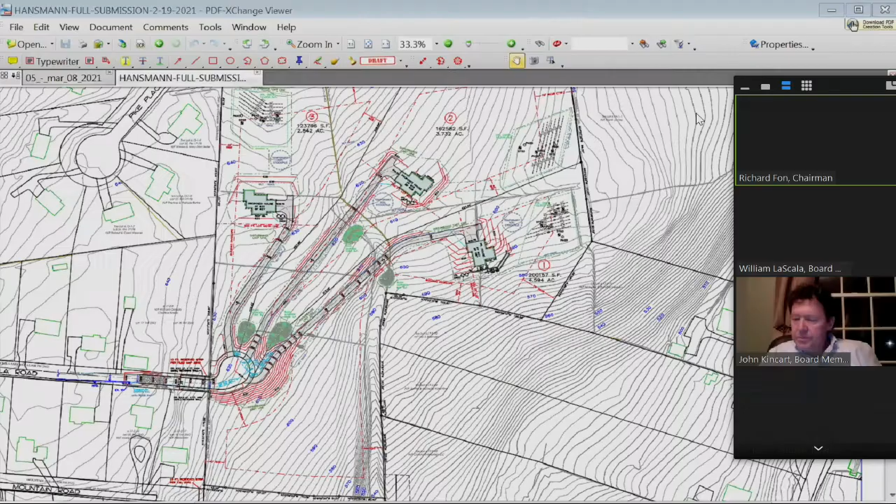Got it? Yeah, I got it. There you go. If you can see my cursor, all we're doing in terms of construction is a loop cul-de-sac that would serve as frontage for 3 proposed lots. That's the extent of the public improvement. The 3 lots that we're showing are zoning compliant.

All of the septic systems have been confirmed. In this arrangement, once the cul-de-sac is constructed, the lots would stand on their own. So if the map is filed, each lot would be sold or developed separately, and the access would be off the cul-de-sac. We did do a complete tree plan, it's included in your package. It's a little complicated to see at this point. We are showing 3 stormwater basins, and those would serve the purpose of treating any impervious areas coming from the proposed driveways. The individual houses would have their own drywells or subsurface systems.

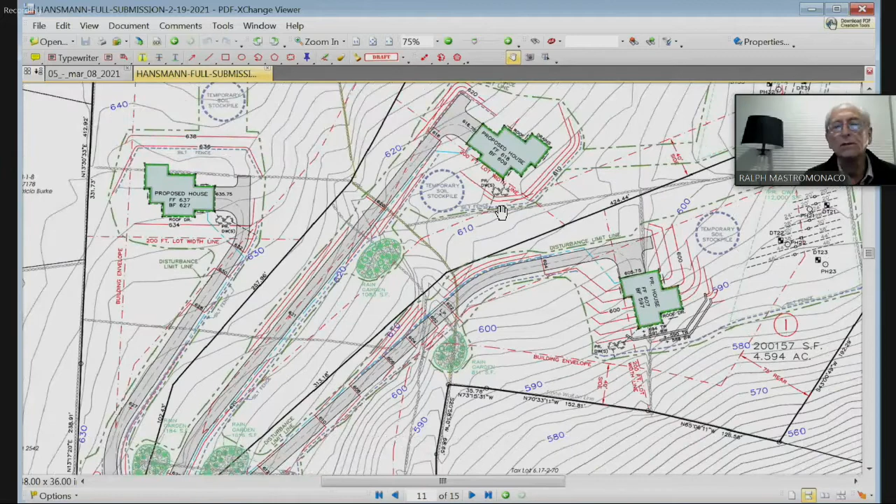The construction of that would start back here somewhere, and that would be a new road from here over. The site is fully graded. You can tell from that lot, it's fully graded. And this would generally represent the end product of constructing homes on that lot.

We've done an erosion control plan, and we've provided details. Other than that, I'm here to answer any questions that you might have.

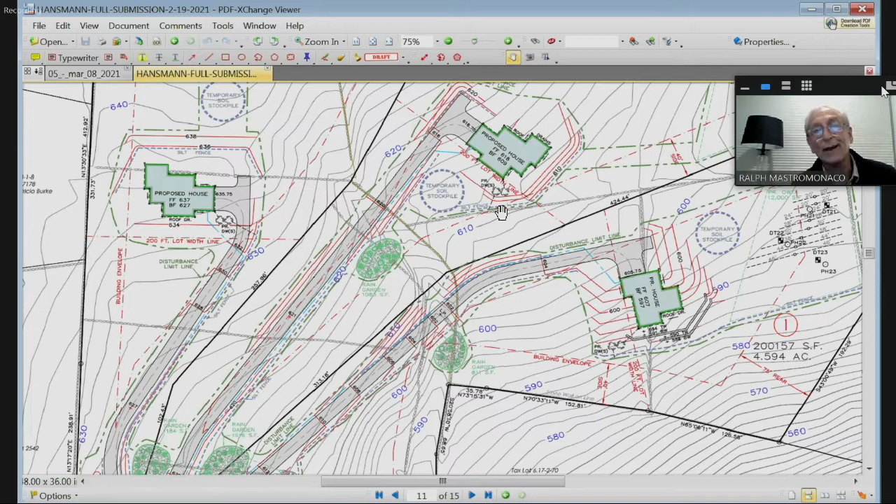I will say that we learned Friday that in our notice sent to the adjoining homeowners, 2 or 3 of the zip codes we thought were Jefferson Valley turned out to be Mahopac or some other town. We simply downloaded the information from the Westchester County GIS in those cases and didn't realize they weren't giving us the correct zip codes. So if there are complaints about an improper notice, there's no problem in us agreeing to postpone to the next meeting where we will get the zip codes right.

Jim, there were three properties - 2 of them were sent to Jefferson Valley and should have been Mahopac, and 1 was an address that should have been a PO box.

I believe the 2 neighbors are actually in the meeting right now. We are - one was me, Patricia Burke, and we're Mahopac. And you guys at the last meeting specifically asked, do we have the Burke's address? I gave it to you, and yet it still went to Jefferson Valley. We're Mahopac 10541. And only for the vigilance of Christine Gogola do I know that the meeting was tonight and everything that was going on.

I also have a question about your list of people that you mailed to. In your project, you're starting on Osceola Road, west of the border of your site. Am I right? You're doing work in the roadbed - erosion and control and drainage and so forth. Is that true? Yes. But the property owners immediately adjacent to that work are not listed in your list

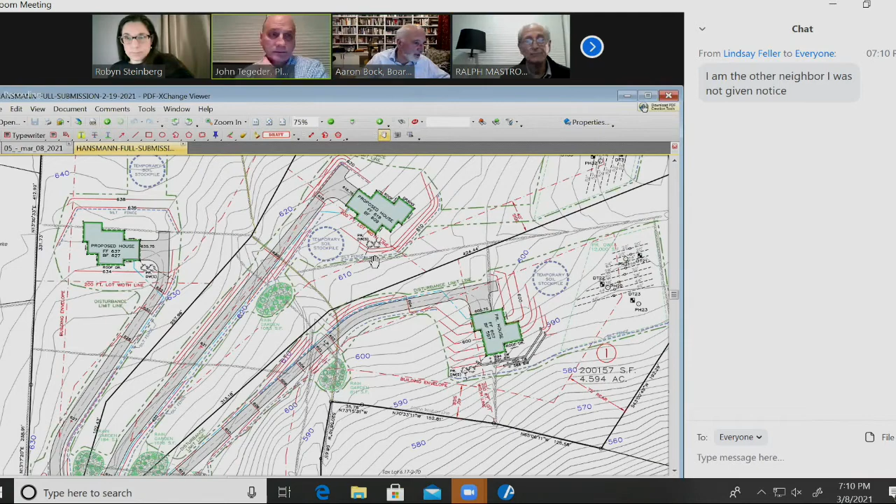I also know that the town code permits the planning board to define the scope of notices that go out. Is that true? That would be for Robyn. I don't recall it. You have added people to the notice at certain times. Yes, but it's not provided for in the code, I don't think. But it is. Hold on, I'll give you the section - I have to hyperlink over to it.

Oh, sorry, who's speaking? Aaron, Aaron Bock. In section...

195-4 of the Yorktown Town Code defines interested parties. It has the normal definition, which says an interested party is immediately adjacent to the site, and then it defines what happens if there's an intervening street. And the close of that section says, or as otherwise anyone else who is designated as an interested party by the planning board. And I think that's what Robyn was referring to - the board has added people in the past.

And I would suggest that everyone who's affected by this in a little broader area should be notified of these meetings and not have to find out about them by informal means. Right, but then you have to designate them. So if you want to designate them, you should do that. I'm not sure we need to do it right now, but at some point we may want to expand the designation to make sure the ones that are missing now are included, for example. I just want to bring that point out.

We just heard somebody message in - Ms. Feller saying she was the other party that was not noticed, with the Mahopac post office address. There's one other too. So the Burkes and the Fellers, I guess. Third. Right, and that's why you need to obtain the addresses from the town assessor so you have the most up-to-date addresses, because we only send updates to the county once a year.

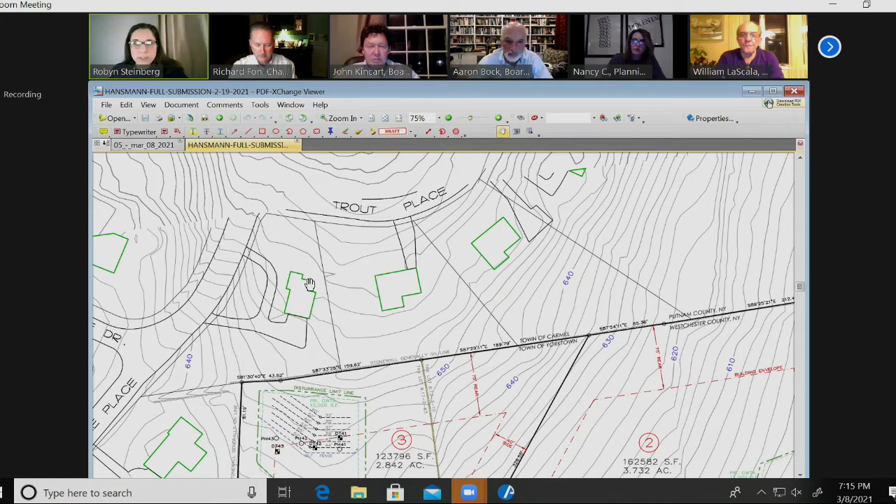I would urge us to require notification to all the properties that abut on Osceola. Yeah, there's 2, 4. Yeah, up to the, because we did have comment, written comment last time. Rich was very good at reading some of the language that we had. And I think one of them was the property owner on the corner, and they were discussing the traffic, et cetera, and so forth. So that might not be a bad idea, right? 2, 4, 6, 8, 10, 12 or so homeowners.

The two that are closest to this property, actually 3, that abut the end of Osceola that will be extended. But I know we heard from a couple of the other residents, and as long as everyone is noticed, we have in the record some comment, but it might benefit the board to have the input from the rest.

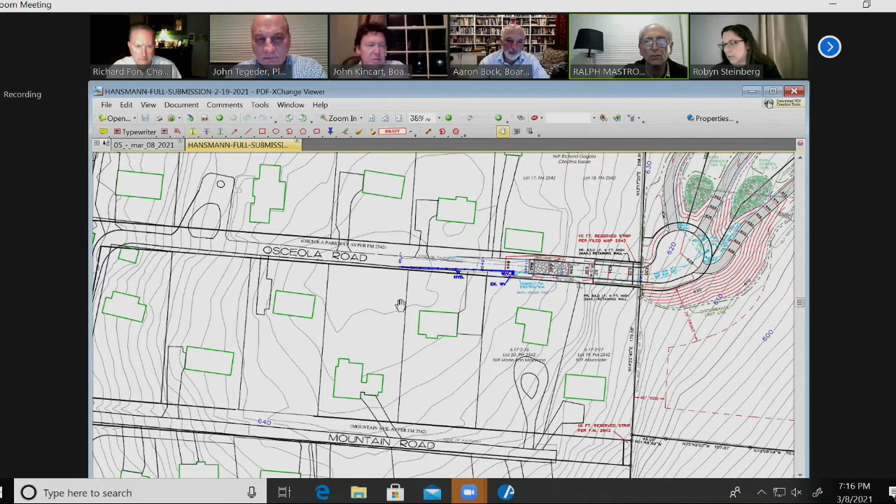Well, we don't have any problem doing that. There's a house here that's actually fronting on Osceola, but it takes. There's 4 of them actually. They're front on Mountain, right? Right. They have driveways from Mountain. So but what we can do is anyone that has frontage on Osceola Road, we will add those to our list, and anyone on this portion of Pike Place, we can add those to our list.

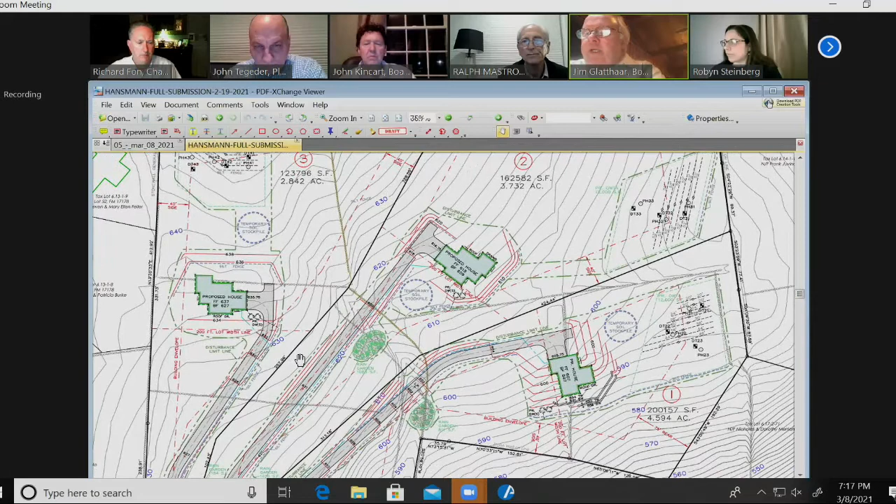And Ralph, just to clarify, this should be treated as a new public informational hearing, not an adjourned public informational hearing. In other words, I would treat the prior notice as a nullity because there were problems with it.

Okay, so are we clear on what you are designating as additional folks that are interested parties? Osceola Road and the 5 in Mahopac? Is that the additional? That's correct. Well, they're in Yorktown, even though they have a Mahopac PO. Right, I meant the Mahopac PO. I know they're in Yorktown. Yeah. Okay, all right, well, I understand that.

Yes. Should we do that by way of a formal resolution so it's part of the record? I would do it as a vote, but that's up to Jim. If Jim concurs, either way is fine. So how do you want to handle it?

I'll make a motion that we define the notice of interested parties to include not only those defined by statute, but also the additional homeowners whose properties front on Osceola Road and the properties that front on Pike Place in the town of Yorktown. Is there a second? Second. First by Bock, second by LaScala. All those in favor? Aye. Aye. Any opposed?

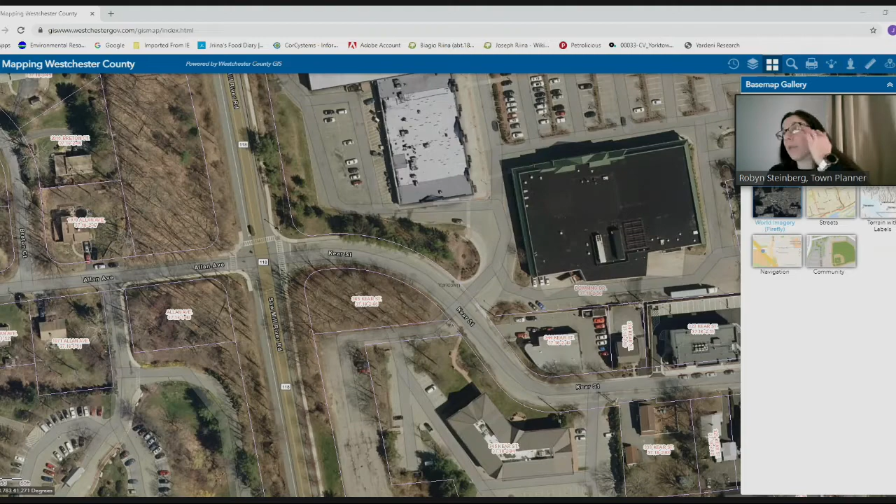Okay, let me go back up again. The main access point off of Kear Street is right here, the entrance to 345 Kear. This main driveway, going to the left, will take you into the Caramount facility.

The site has 2 parking areas: a lower parking area to serve the retail, and an upper parking area to serve the residential portion. The first parking area to the right has 5 parking spaces for the retail. The upper 2 floors overhang the retail, so this dashed line represents the front face of the retail, set back below the overhang of the upper 2 levels of apartments. There's a loading zone here.

Trash containment will be located here; the truck will pull in, back in, pick up the dumpster, back out, and head out again. Off to the side, there's a little plaza with tables at the same level, accessible from the lower retail level, so should there be some food or convenience service, patrons can sit out at tables in that plaza area.

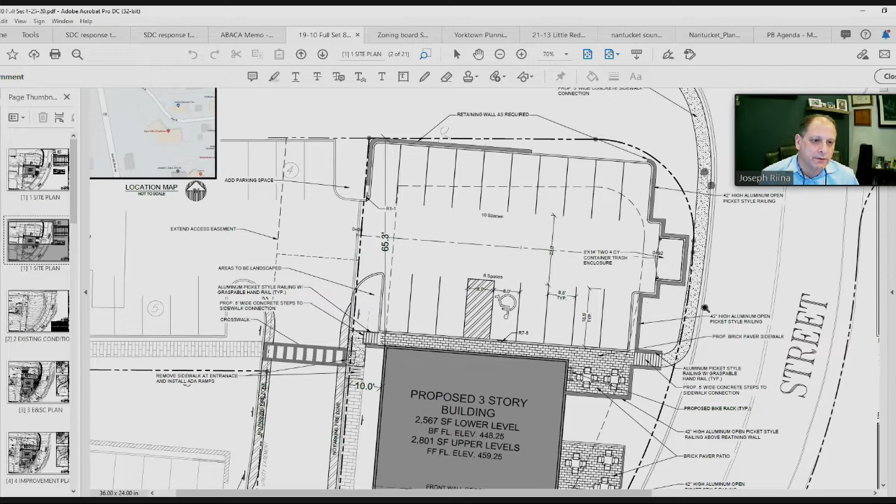In total, the building's square footage will be just shy of 8,200 square feet. There's an existing crosswalk here which will be maintained. Because of the grade change, we cannot provide full ADA access up to this level from the crosswalk, so there would be steps coming up here. We're extending a sidewalk from here to the corner of 118, where there's a crosswalk, but again the grade change doesn't allow for an ADA compliant ramp down to that area. So ADA access would be gained from this parking spot, with access right into the front of the building.

So altogether, there's 23 parking spaces. 23 are required, so we meet the standard there. The building meets all the other dimensional requirements for the zone, setbacks and height.

There was a question at one point of where the front yard is and where the side yard is. We conferred with the building inspector, and he said on a corner lot you pick one main front yard and one side front yard. So Kear Street would be our main front yard, and the 118 side would be our front side yard.

Okay. Still see me now, right? Yeah, okay.

We've prepared a SWPPP for the project. We've got two separate stormwater management areas, one in the upper parking lot, which are subsurface infiltrators. They'll be under the parking area, as well as a second one for the lower parking area, which is below that parking area. There's also a downstream defender, which is a water quality unit, located past each system, and that provides polishing of the stormwater before it goes into the municipal storm system.

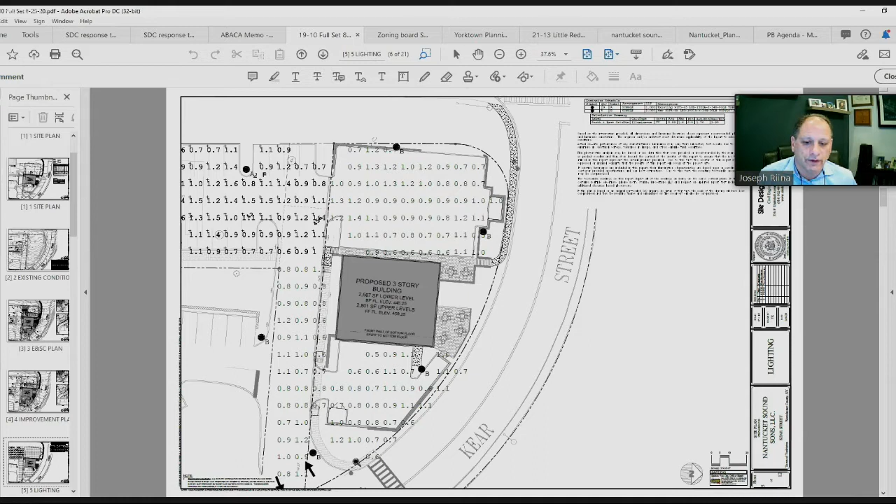We prepared a lighting plan, which shows that there'll be no ill effect from spillage of lighting off the site. ABACA has approved the lighting fixtures and the lighting plan.

Landscape plan was prepared, which you've seen before. The only change that I'd like to mention that was significant in a sense was ABACA felt that the plantings along this edge here were too dense, too closely spaced. They thought the view of seeing the seating here in this plaza area was important as you're going up and down Kear Street, and it would provide an attraction for the retail use.

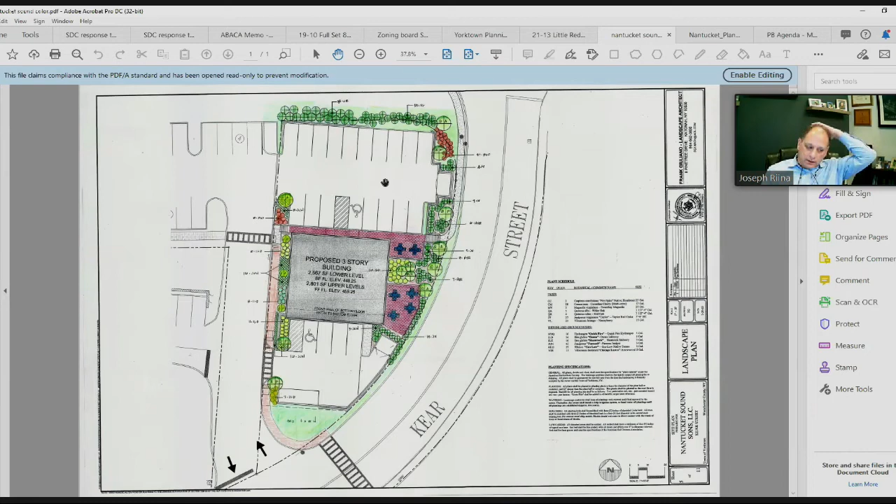So that spacing has been increased, and it is now less dense and lower in height, so that you do get some green visual buffer, but not enough to totally screen this area. Everything else is essentially the same as what you had seen previously. Along this edge of the parking lot, there's some additional plantings being put in for densification of that screening in that area. As you can see, this edge is all beautifully landscaped, as well as this edge here.

At the corner here, there's a sight easement here, as was pointed out to us by John Flynn, which no one had picked up on. The surveyor has not picked up on it, but there is a sight easement here. And now this is all lawn area. Previously, our parking lot extended into this area, and we had plantings in this area. Now it's going to be strictly lawn area and maintain that visibility there.

I think that's it on the landscape plan.

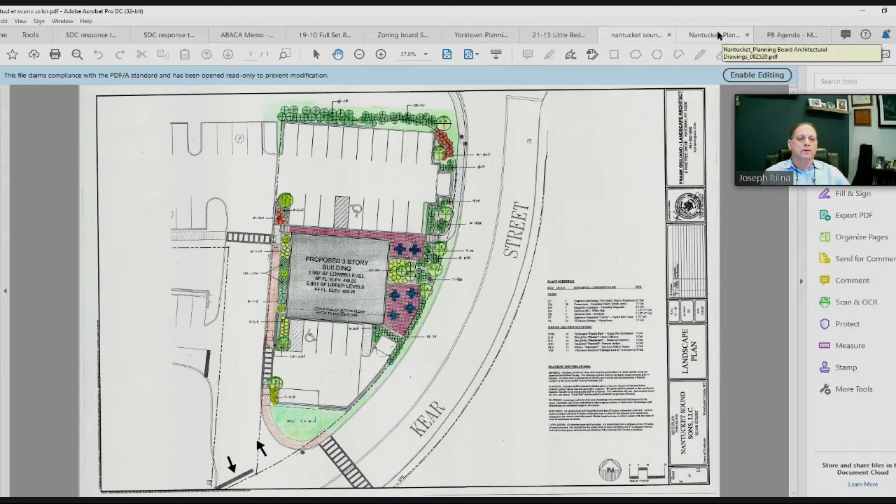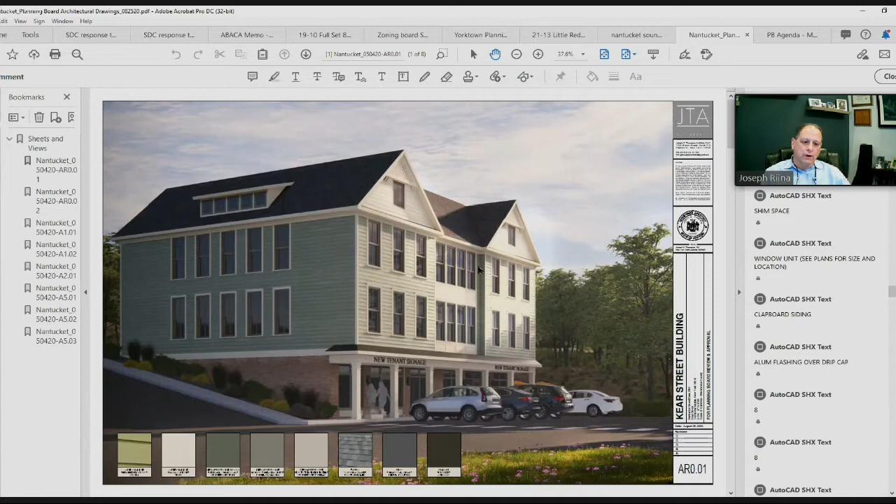So as I said, I was going to provide you with the architectural view. This is looking now from the main access drive, my back to 345 Kear Street. This is the lower level, the retail level. As I said, you can see it's set back from the two upper floors, so it's pretty obvious how that's going to look there. And then we have a view looking from my back at the corner of Kear and 118, looking at the two residential floors and the main entry point there.

One last thing I would like to address is the tree count and the tree disturbance. I responded to the tree committee's memo, and you received that, I think in August. Essentially, what they said was that based on a 2.5-inch caliper tree, we would need about 178 trees to make up the 447 inches of DBH that we were removing. Based on our calculations, our average DBH is 3.75 inches, not 2.5 inches, and at 93 trees, that puts us at about 119 trees that would be required - the DBH equivalent of the existing trees that we're removing.

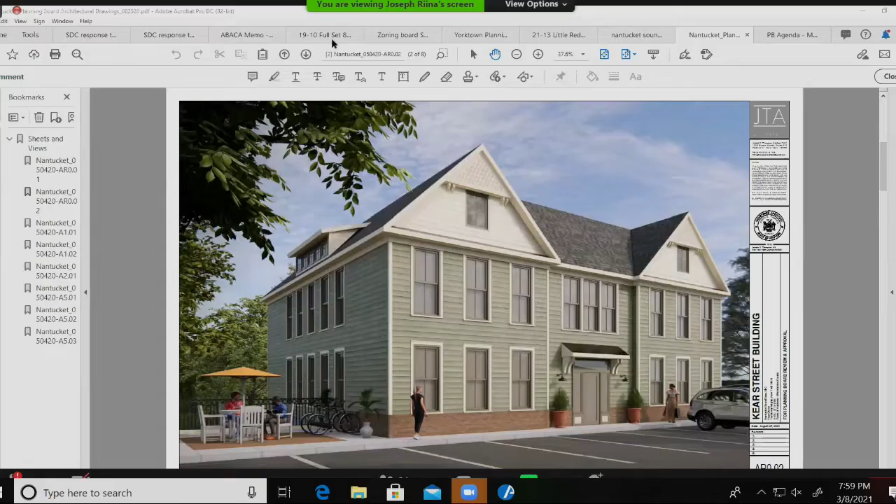Regarding some of the comments given tonight about the off-site parking, that's from an old plan. That's no longer the case. If I could share my screen, Robyn. You all see that, correct? Yes. Okay, that is no longer the case. There's no parking space proposed off-site. All of the 23 parking spaces are on-site.

Regarding the dumpster, if the gates are left open, as you can see, the dumpster location has been slightly recessed there. Frankly, if someone needs to get in or out of the spot and the gate is open, they will close the gate. I'm the type of person that when I pull into a shopping center parking lot, if there's a carriage there, I will get out of my car and move the carriage. So there are people that will do that if necessary.

Regarding the open space, as stated, we meet the requirement, which is none, but we are providing some form of open or passive area for the residents. In addition, as I stated, within a short walking distance there's a town park and trailway, so there are adequate facilities within a short walking distance for any residents who would like a park-like setting or to go for a long walk.

I don't even know how to respond to the coronavirus points that John made. Unless we want exterior staircases to the apartments like an old-fashioned garden apartment, there's no way not to have a common corridor to access these apartments, and I don't think that's a look the town is looking for. There are plenty of residential uses where people make do and figure out a way to stay safe entering and exiting. My daughter lives in New York City in an apartment building. They manage to stay safe and keep common areas sanitized as necessary. Hopefully I want to be optimistic that this coronavirus issue will not haunt us in the long term.

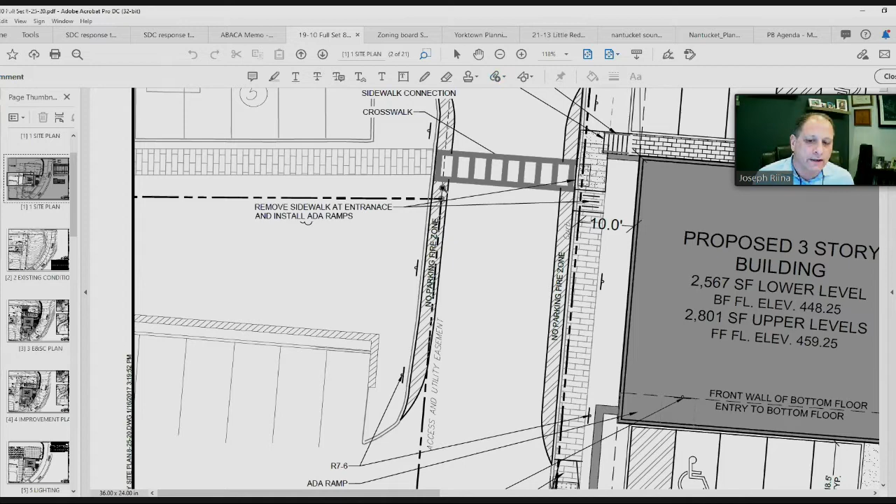Lastly, regarding the fire truck, the fire inspector speaks for the commission. He attends the meetings, presents the applications to the fire commission, and they speak through him. Regarding this site, they made it clear they would not bring their trucks into the parking lots on the site—that's not something they would do. They asked for fire lanes and posting of the drive, and we've added that here. So you've got a no parking fire zone with signage on both sides. We've met that requirement.

Lastly, regarding the TCAC and the proposition we've made regarding the amount of trees being removed and the plantings put in place, I think the code does speak to allowing landscaping as mitigation. Number two, we responded back in August to their memo, and they have yet to respond to our response. So I don't know how to take that at this point, but I think ample time has gone by for them to respond to what our proposition was. Further, the applicant has stated—and we have this in our letter from August 25th—that if the planning board feels additional mitigation is warranted, they would contribute to the tree bank monetarily and make up the difference if the planning board feels they are short of that.

With that said, I don't have anything else to say other than we would like to have the public hearing on this closed this evening. We've already had a public informational hearing on this project. It's been kicking around for a while. It is not the planning board's fault that we've been gone for several months, but that's a side issue. At this point, I think we've done our homework and addressed everything we've been asked to address. Thank you.

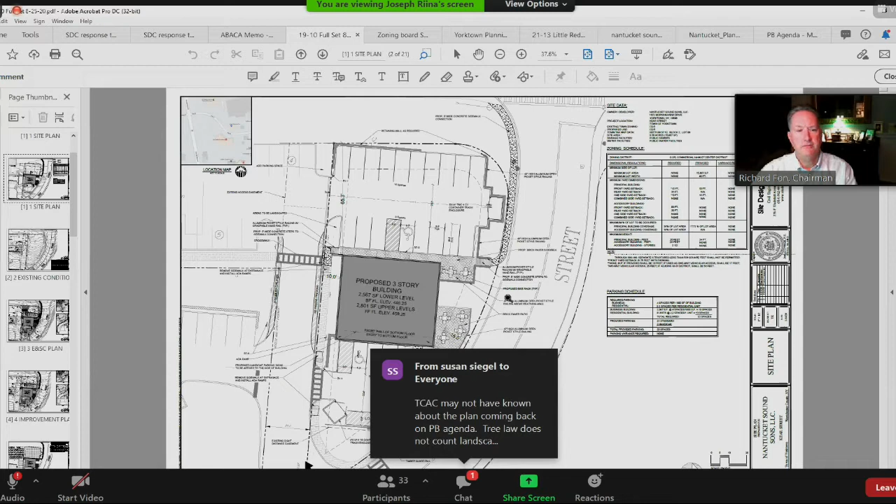Thank you, Joe. Okay. Anybody else, Robin? No—oh, I think John wants to speak, I see him waving his hand. Go ahead, John, you're on mute. Okay, I'm off mute now.

I didn't hear Joe address the questions about waste management, both the size of the dumpsters. I went up and talked to the caretaker, the maintenance guys at York Ridge Apartments, as I was thinking about this site, and they tell me they are just overwhelmed with cardboard. John Tegeder has been talking at different venues about the Amazon effect, and these guys would certainly agree—everybody up there is ordering things on Amazon instead of going to stores, and one of the side effects of that, in addition to empty storefronts in brick and mortar places, is that apartments like this just are overwhelmed by cardboard boxes. So I didn't hear Joe address that. And at least cardboard doesn't smell, which that commercial dumpster probably will, particularly if there's a restaurant in that commercial use. So I'd like to hear Joe's response to my question about putting that one commercial dumpster within 5 feet of the apartment buildings.

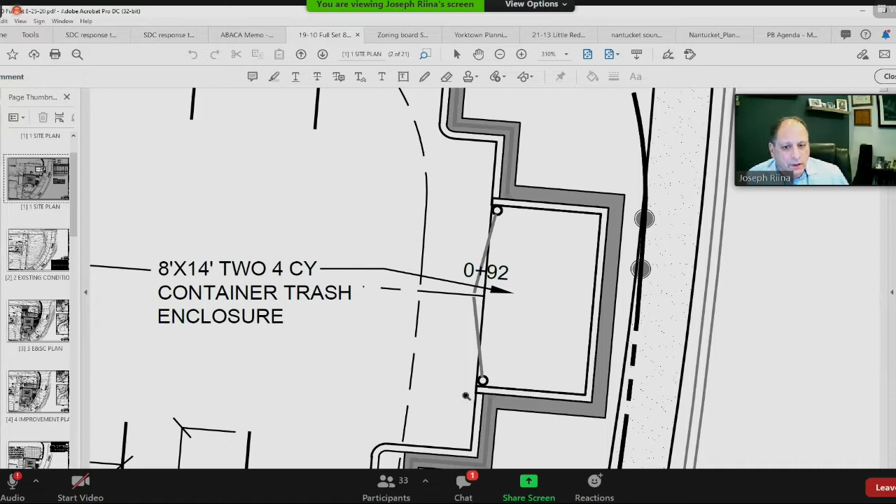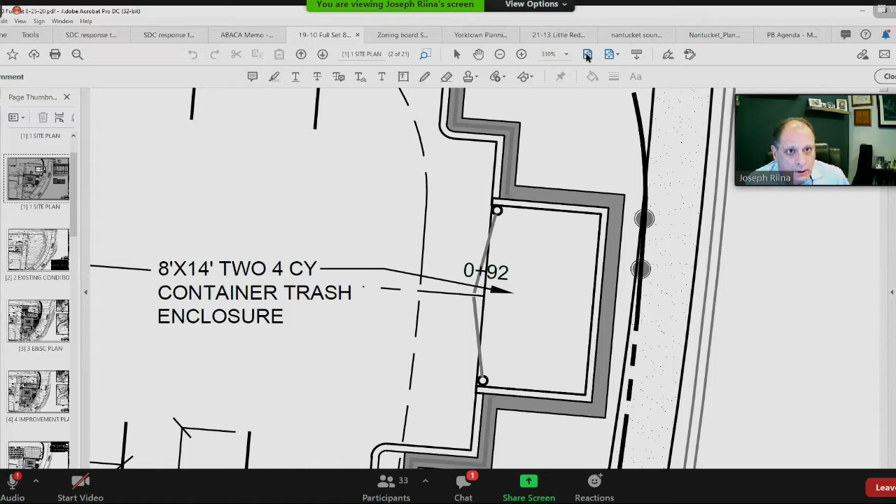As far as the size of the dumpsters, we called Westchester County on this and got their recommendation. For the residential portion of the property, there would be the ability for two 4-cubic-yard containers, one for recyclables and one for trash. For the commercial portion, we've got enough space for one 8-yard or two 4-yard containers, depending if they need to meet a recycling need, then they can have both, or they could go either way: full trash, or trash and recycling containers.

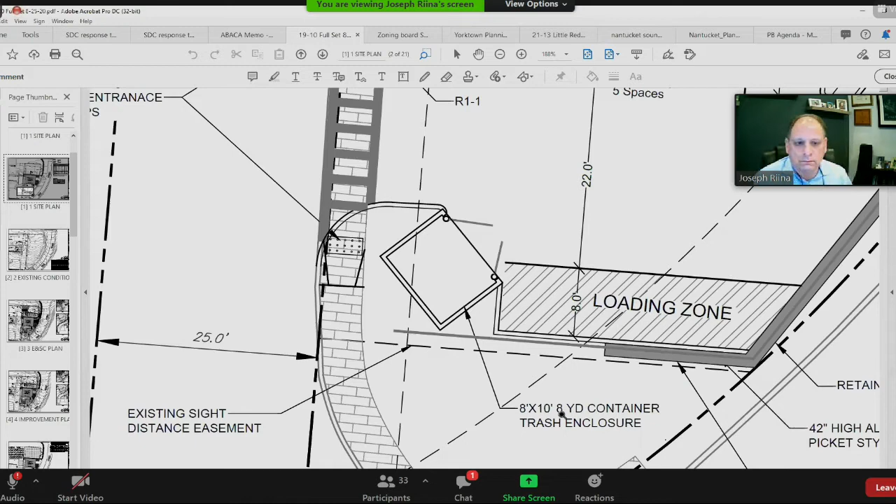That certainly addresses my question in terms of that commercial dumpster. Yeah, but we checked with the county on that, and we got their recommendation on that.

To address what John Tegeder called the Amazon effect, this is an absolute fact - it's amazing what's being left out on the road, but it's the responsibility of the property manager to deal with that. You have to break down the boxes, you have to recycle correctly. I think Jake Hopstein just asked about food scraps - there's a lot of things changing in the county and the way we pick up garbage. But a lot of that could be handled by the company picking up the garbage. It might be an intensity issue, maybe it's not twice a week being picked up, maybe it's got to be picked up three times a week. That's something that's going to have to be addressed as we look at these applications, and it's the responsibility of the management companies. But it's a very valid point.

Anybody else? Just to add to that, Rich - what about the individuals? I mean, we're talking about how life has changed for all of us, but what about the individual? They should take a little responsibility for their trash. Boxes need to be broken down. The management should let them know we want you to break your boxes down and put it in their hand. I don't know, maybe that's old school thinking and everybody wants a handheld with everything now, but I think the individual should take responsibility.

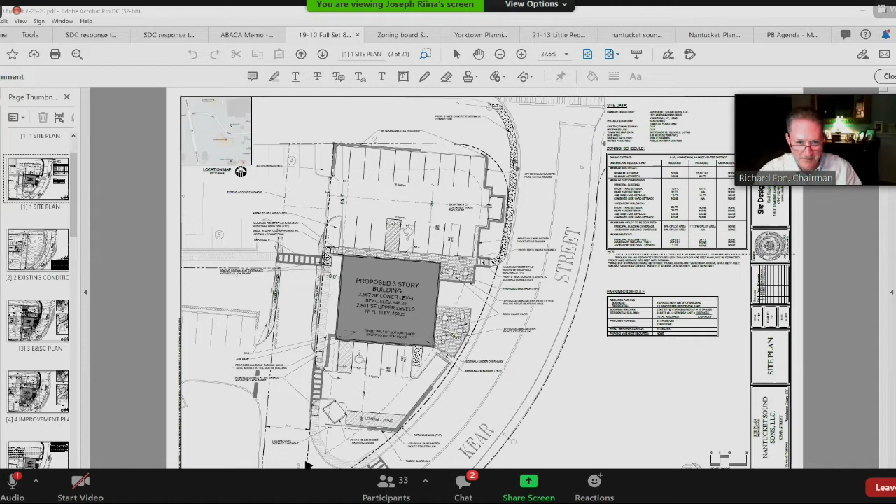Joe, I have a question for you. What's the date of your latest revision on the site plan? 8/25 was the latest revision. Of last year?

So the one I'm looking at still has the trash enclosure right adjacent to that patio, and it's dated 8/25. Something's wrong. Let me just make sure that's the date. That date is correct, and that's what it says on this one.

Are you looking at the revision date? Are you looking at the plans in the planning board books, the meeting packet? That's not what's in the meeting packet. This is what you put up.

I have a site plan, originally March 14th, and then second revision August 25th, and it still contains a reference to an 8x10, 8-yard container trash enclosure right adjacent to the building. That might be a misplaced note that got moved to where I'm showing it here, down at the bottom. That's probably what happened.

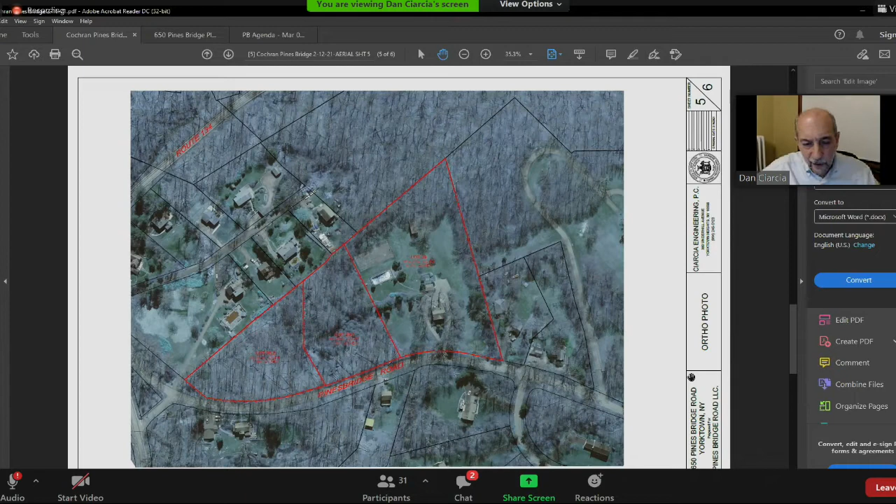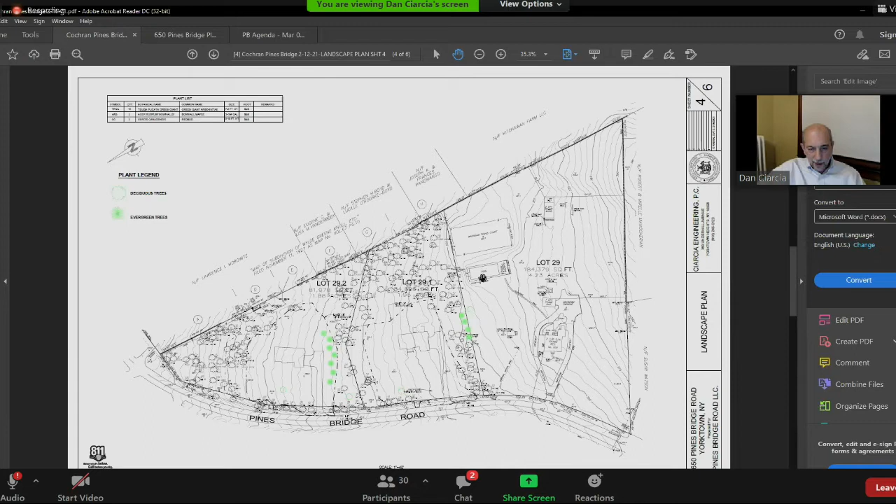Dan, just real quick, we did have an opportunity to touch on the application and you being appointed by the town board to act as one of the town engineers. It's also our understanding that there is another engineer appointed along with you. That's correct, Lynn Starr has also been retained to help the town out. So just to be clear to anybody out there, you will not be reviewing your own plans. That's right, obviously that would be a bad thing.

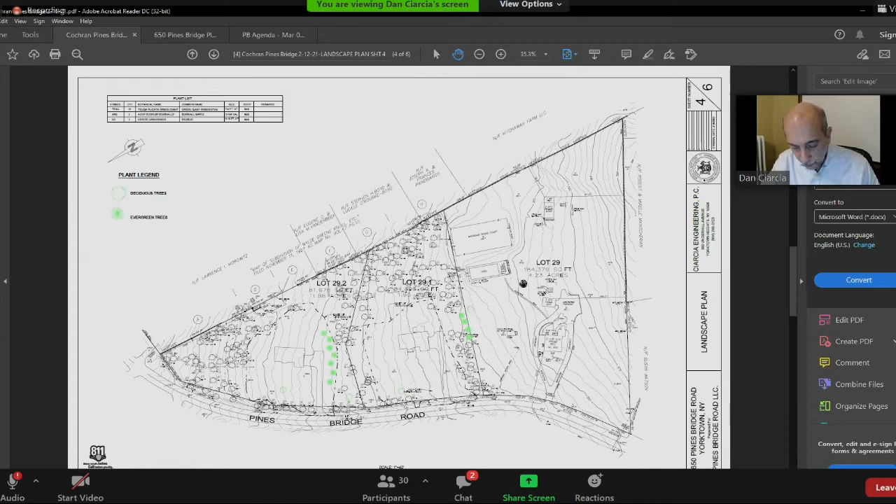We also, Dan, just going through the background notes, saw an open memo from the Conservation Board dating back to January about mitigation comments and their wish for that to be followed up on. Is there anything else with that? I have one from October 22nd. I think they're looking for the mitigation. The two things would be the tree issue, touching on the mitigation and coming up with an appropriate mitigation plan, and the stormwater, the SWPPP, stormwater pollution prevention plan, which I believe we submitted, though it was subsequent to this memorandum.

At the last meeting we talked about it, you said Mr. Cochran actually went out and started to destroy some of the invasives before the plan got approved. Well, they're still lying on the ground there, so you can see. So there's proof of the work. But so there's the memo, there's the tree board mitigation, and there's also the conservation board mitigation.

So I'd ask the board, what's our thoughts on this one? We have three agencies that have questions right now. Let me help clarify the conservation board memo: share the tree mitigation plan when developed.

Why don't you explain what you mean by that? Hi Phyllis, sorry if this was confusing. When a tree mitigation plan is developed by the applicant that satisfies the tree commission, it should be shared with us. So it's not wetlands or anything, it's trees. Yeah, trees, okay.

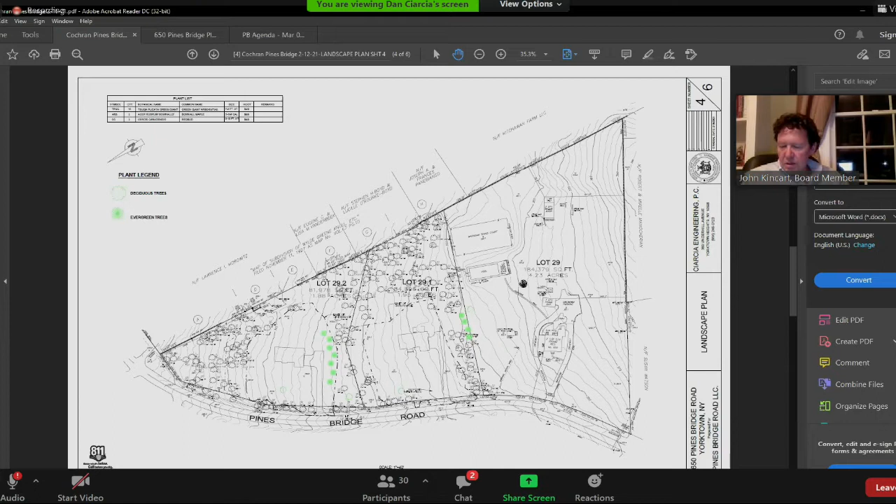Right, but that doesn't preclude us from closing the public hearing. We've had several comments from the public, neighbors, all along throughout the process. Once again, I cling to the fact that we're going to be looking at this into the future and deciding what's appropriate and what's not appropriate, correct? I agree with that.

Hi everyone. I did talk to the different parties involved, and I don't think the other property is going to make sense for us to do anything on right now. There is a possibility that it's going to have a different owner soon, and so it's going to get too complicated to try and do stuff over there. So we'd like to do any type of mitigation, have the plan set for this property alone, and figure out what we can do there.

Right, and you're aware, Alex, of your options, right? I mean, there's the tree fund, there's work you can do on your own property here, there's work you can contribute to planting on other town-owned properties, or even possibly removing invasives on other town-owned properties. So there's a plethora of options that might be considered, or that you might present to us to have us consider, even if it's not with that property adjacent, in the rear.

So is that property on the market? No, there could be a private party purchasing that property. Yeah, I'm just suggesting that if there are mitigation measures that could be done there, it's close, it's accessible, right next door, meaning it has a nexus to this tree removal. So if it's possible to do some mitigation there, let's say shortly after you have this approval, and that mitigation is finished, then it changes hands, the mitigation plan has been largely completed for this project for all time. Yeah, I guess that's something to seriously think about on your part.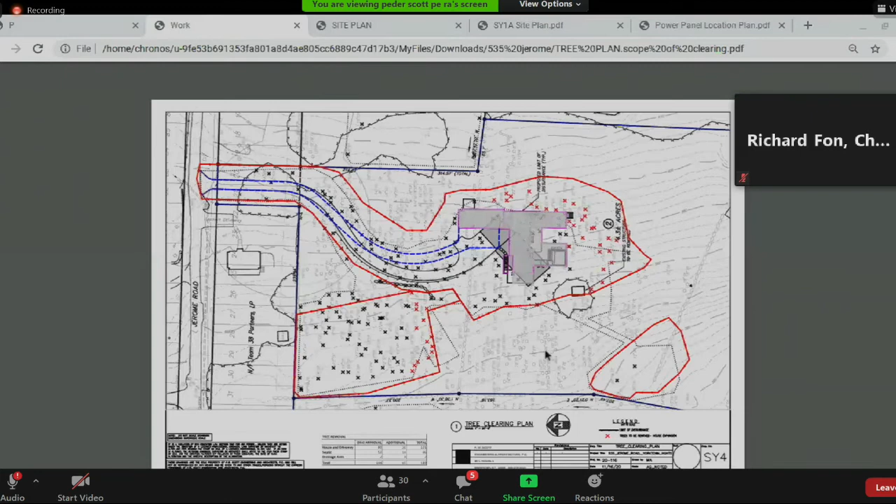So this project before you basically consists of an expansion of a subdivision. And the first part of our project is that we basically showed the limits of disturbance of what we're proposing. We showed all the tree removal with the original approval. This was the original house that was approved for this project. And we show you the new house shape, overlaid that. And we showed where our expansions in the disturbances are from the original subdivision. The ordinance seems to indicate that a permit is exempt for the septic systems. It's one of the exemptions. So we're looking really at all the little red dots you see over here - those are all extra trees that had to be cleared for our particular project.

We're a solar project. We have a solar roof component, and what we did is we faced the gable end of our house toward the tree lines. We needed to clear that many, and we're clearing typically in the southwest corridor where our sun is coming from, and that's kind of the basis of what we're doing with this project. Hopefully this will open up. Bear with me.

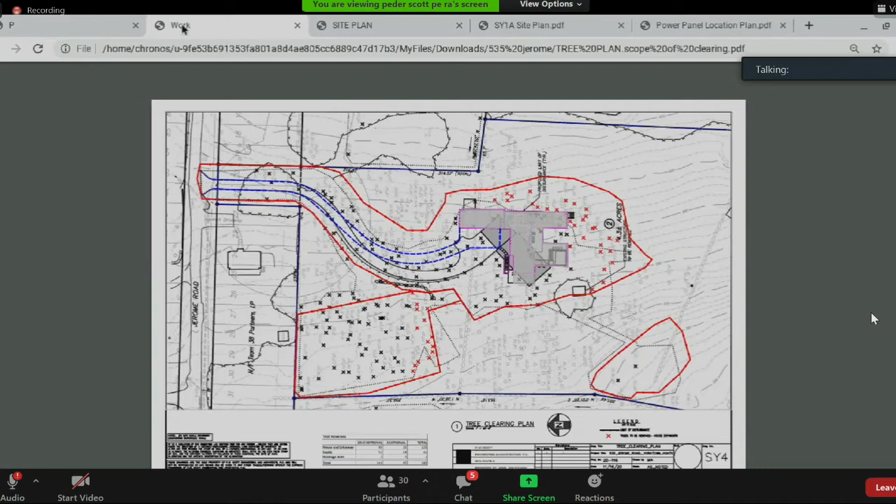So what we propose for mitigation is we looked at the function of what the trees accomplish for the project, and we worked accordingly. We used a three system approach to the project.

The first thing we did is we mitigated a fantastic grove of bamboo in this area. We're not sure what it counts for when you do your DBHs, but there's about a 2-inch tree every 12 inches on center for an area which is 20 by 60. So just by eliminating, we're going to cut them out, dig out the roots. We have to burn everything as a mitigation approach. You can't give it away to somebody and create more bamboo somewhere else.

And then we're putting in a 4-foot deep plastic liner nested in the ground, which is what SavATree says they do for eliminating bamboo. So that's the first part of our mitigation right here.

The second part is we looked at what the function of the trees are. Basically the trees are to give a buffer for development from the neighboring properties. This proposed and approved lot 1 of the 3 lots for the subdivision is clearing right up to the property line with their septic system. There's no room for them to put anything on the property to buffer our project from theirs. And because we're downhill from them, the best approach we took was to put in a very extensive buffer.

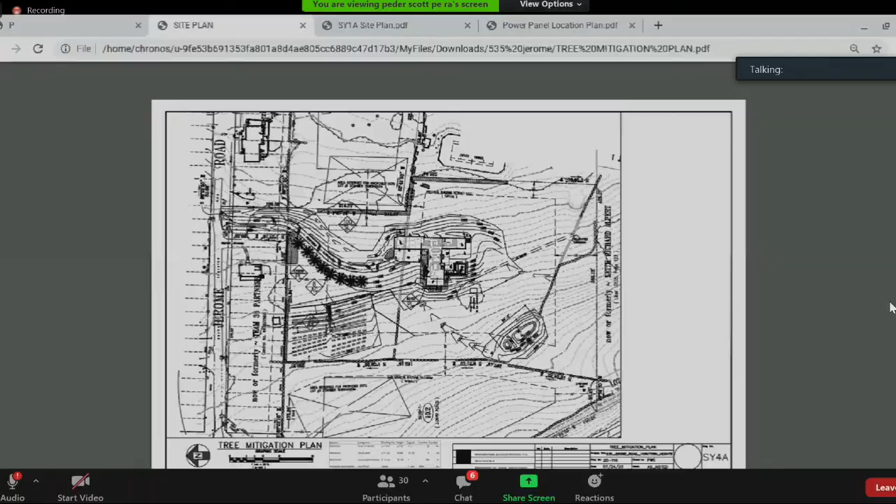But the gist of the whole project is the stream: after the dam failed, the stream was created to the remnants of the pond base and extended off in this direction toward the new reservoir. It's not affecting any neighbors, but it did wash out into a big wetland to the north of us on its way, dissipating the water.

The concept is that we have to dredge all this silty material, which is located in this portion of the project. It has to be leaving the site through a corridor which extends to Illington Road, which serves as frontage to the west.

The DEC has a massive herbaceous planting plan, which was approved by them, consisting of 1,200 plants around the perimeter. But they aren't trees, because we're not allowed to put trees there. So what they are is shrubs and herbaceous bushes, nothing woody, because that's in the dam regulations. You can't have anything with big roots that seeks water, because it causes a void in dams.

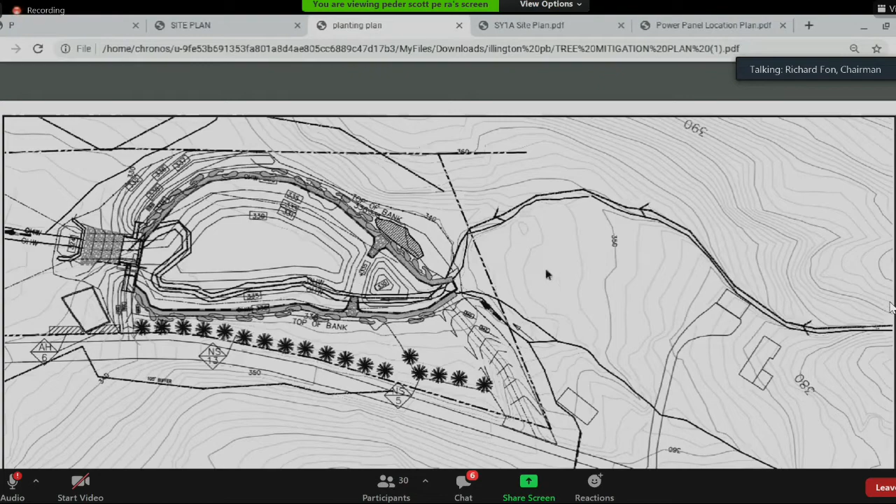All right, so in reference to the board, I think it's pretty clear that there really are no planning comments here unless anybody could think of some. None, I don't see any. So I think that will be our comment or our memo to the board. Thank you very much. Anything, Jim or John, you think we missed? No, nothing from me. All right, Mr. Scott, good luck. Oh, thank you very much. Hopefully you get your 21st permit. Yeah, thank you. All right, take care, have a good night.

Okay, next on the agenda is Ellington Subdivision. This is a discussion of subdivision, address is 1075 East Main Street, beautiful Shrub Oak.

Good evening. Good evening, hi, it's Joel Greenberg, I'm the architect for the project. This is, as you said, in beautiful downtown Shrub Oak. It's about 1.66 acres of land. On the front of the property facing East Main Street is a beautiful restored 2-family house, which was restored by my client, and there's a cottage next door to that, right behind it.

However, back in 1981, a variance was granted on this property, it's in an R-10 zone, but the requirement is 20,000 square feet per lot. A variance was granted back on June 25th, 1981, which you should have in your packet, indicating that the rear lots could be 14,043 square feet, and that's what we've shown here now. The other lot is 14,482. So let's just get on to this.

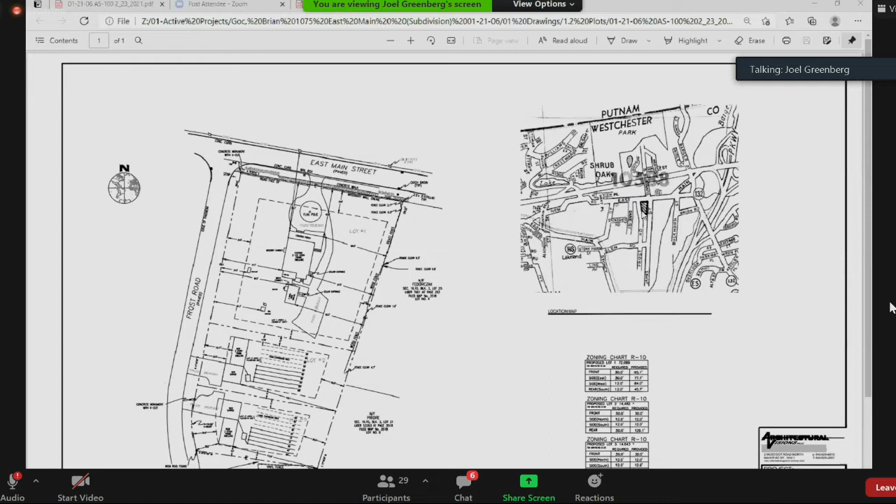Okay, first of all, location-wise, it's at the corner of East Main Street and Frost Road, right off East Main Street. If you pass by there, certainly the house will be very outstanding because it's an outstanding house. Looking at the site plan, here's East Main Street, this is the circular driveway in front of the house, this is the house that was restored, and this is the cottage that's in the process of being restored. Back behind that, along Frost, accessing from Frost Road, is lots 2 and lot 3.

We have applied to the Westchester County Department of Health. Their indication is they won't set up any inspections for deep test holes and percolation test holes until the snow is gone, so keep your fingers crossed for tomorrow and Wednesday for 60-degree temperature, so we can get a start on that. As far as the original surveyor, unfortunately he got ill, so we were a little behind on getting the topo and the tree plan.

Most of the trees are in this area back toward lot number 3. There are still a few trees on lot number 2. But for your next meeting in 2 weeks, the new surveyor has indicated that he will have both the tree plan and the topography for your next meeting.

If you pass by the property, it's virtually dead level from front to back, so I'm pretty sure we're not going to have more than a couple of topo lines on it. The houses will be supplied by town water, and as you can see from the drawing, there'll be 2 septic systems. Driveways will be off of Frost Road on both cases, and we meet all the setbacks for both the 2 new lots and for the existing house and cottage. Basically, it's pretty straightforward, and I'll answer any questions.

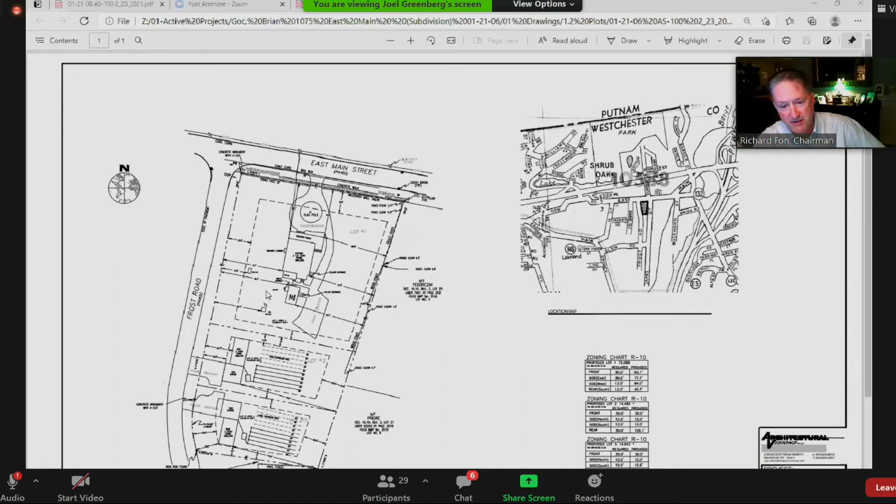Really, really nice job. Not only did they take that house and restore it and do a beautiful job, but they bought a house next to the restaurant Bangkok. That's right. Tremendous. Just down the street from the restaurant, just on the curve there.

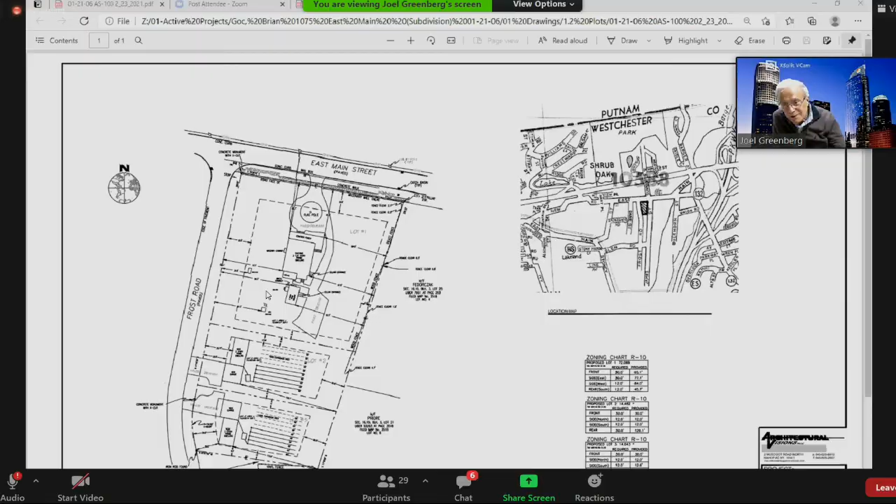My client also purchased that house, which was in pretty poor shape, and there was a garage behind there. So both buildings were completely renovated. And again, as you're making that curve, you see the church on the left, this building on the right, and behind it is a cemetery. Right, I was going to say the quiet neighbors next.

Very quiet neighborhood. Well, that house has a colorful history. Really? There was a time when the town board was proposing some regulation of the Shrub Oak area, which would have included certain regulations on what you can do with your properties to achieve a unified visual impact. The owner of that house, in protest, painted stripes, multicolored stripes all around the building. Wow, and that was visible for a while. Then they painted it over after the proposal died.

So it does have a history. It does. Well, let me tell you, the good thing is when we dug to fix up the foundation for the garage, thank God we didn't find what I think you know what I'm talking about. Yeah.

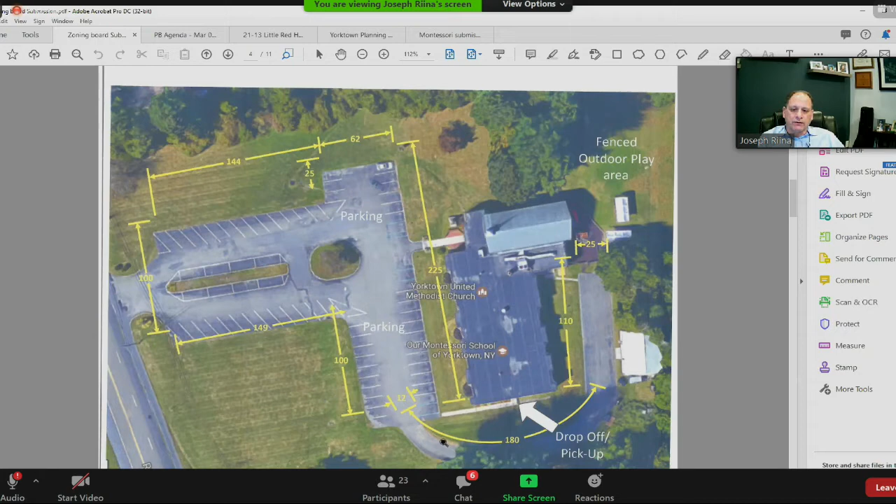To take you in a little closer, this is an aerial view, as you can see the site. This is the setup inside. The main access point is going to be on the right side here. The intent is to use these 4 classrooms.

What Melanie is proposing is to increase the number from 48 to - and I'm sorry, I skipped the part where they had 30 and the ZBA at the time allowed them an additional 18, which would put them at 48. What Melanie would like to do is expand that and go up to 58 students and occupy these 4 classrooms. This is a diagram that shows

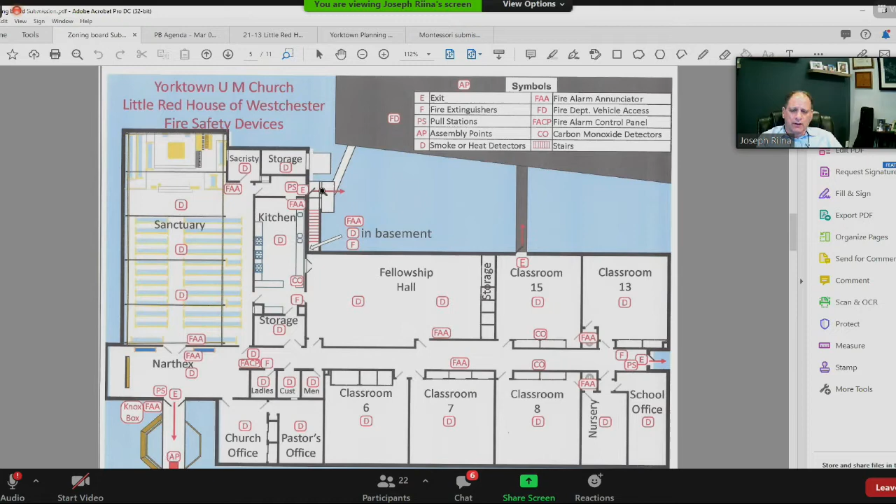all the safety aspects, the emergency accesses, assembly points, and so on, which I will describe in more detail later on. Then there's a secondary exit point, which would be the main door, as well as another exit if necessary out the rear side of the building.

This is a diagram of the outside of the building and the exit points, as well as the assembly points, where the fire trucks would enter and have access to. As you can see here, it points out that there's a Knox box at the front door in case they need to get into the building.

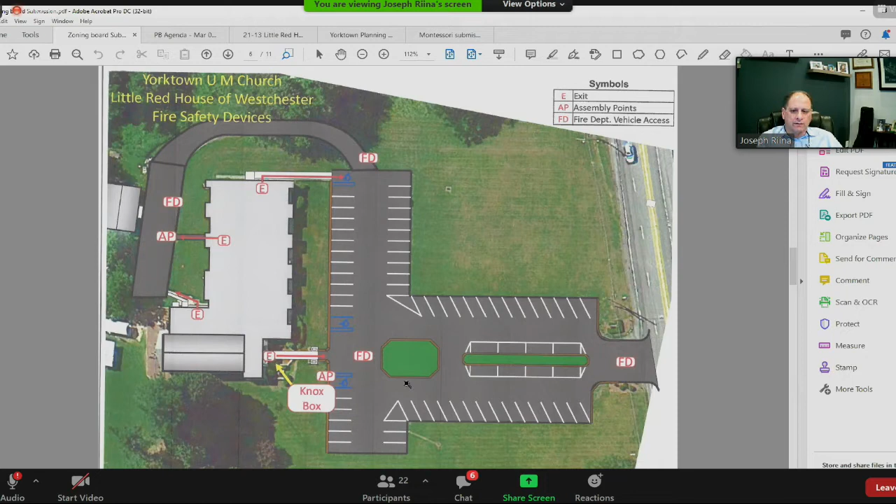So this building is sitting vacant, and this area is not used for anything. As I said, the Montessori program is out of there now. So at the time when these programs are going to be in place, there's no other use going on there other than maybe some administerial operations for the church.

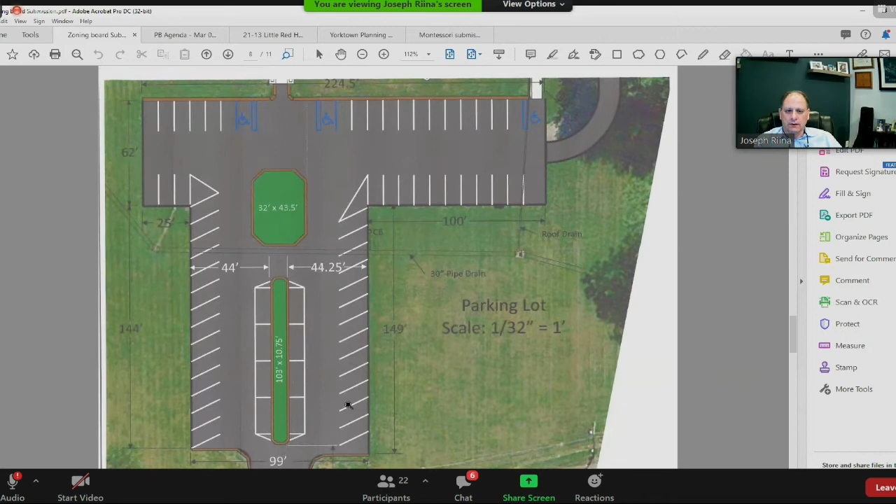And they acknowledged the fact that the use of the building prior was, although not permitted under the current code, a grandfathered use, because it was in place before the zoning code was changed to make this type of operation a special permit use in the residential zone.

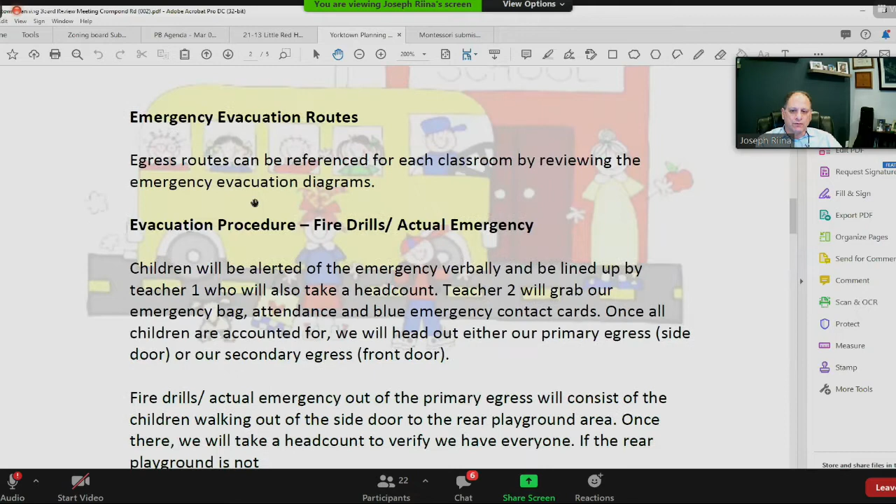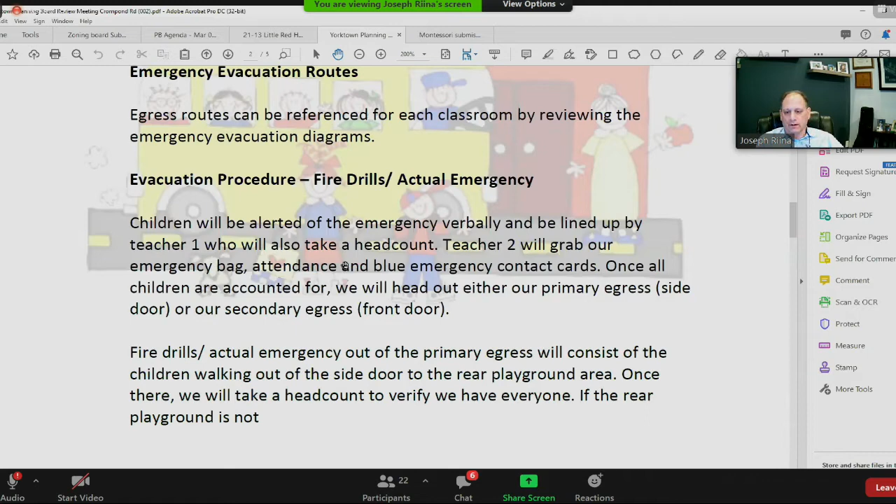The children will be alerted of the emergency verbally and lined up by one teacher who will take a head count. Teacher 2 will grab the emergency bag, attendance, and blue emergency contact cards, and they will all egress at the primary egress to the area where they're going to be meeting up. They're going to have fire drills to practice that.

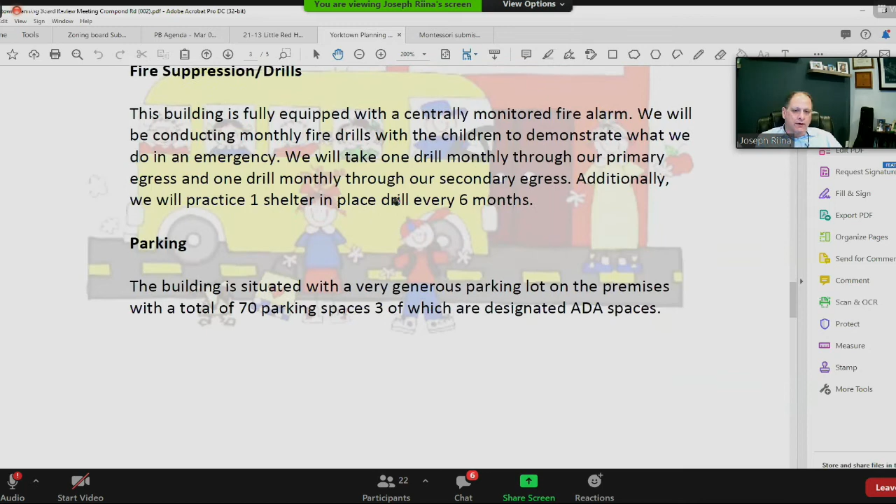Walk the children out the side door to the rear playground area. There's a fenced playground area behind the building. In the event they need to be evacuated from the site, they're going to ask the police department for assistance and probably move them across the street to the police department. The building is equipped with a centrally monitored fire alarm, and there are fire extinguishers throughout the building, noted on the diagram I showed you before.

Let's talk about the parking. Here it says 70, but it's actually 69 parking spaces. Drop off will be entering through the side door. Door will be locked at all times. Parents will be provided a code, and it's estimated 15 cars between 7 a.m., 13 cars between 8 and 9 a.m., and 12 cars between 9 and 10.

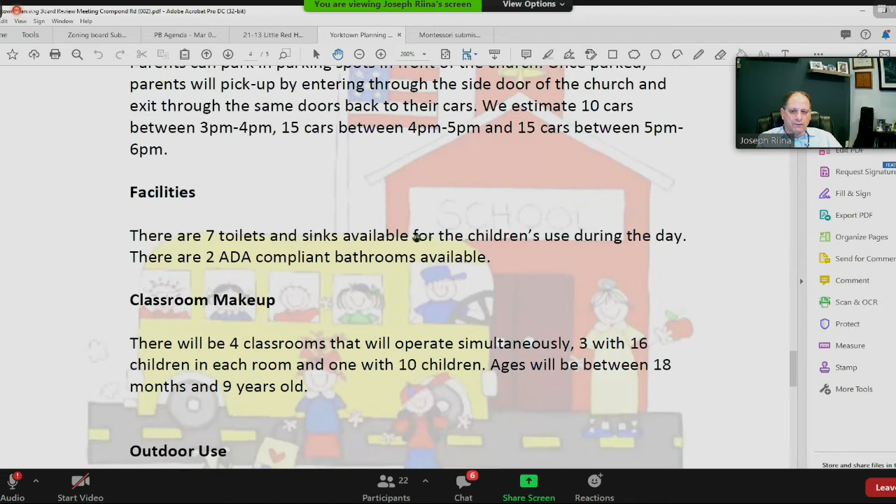Pickup, same, the reverse operation: 10 cars between 3 and 4, 15 cars between 4 and 5, and 15 cars between 5 and 6. There's plenty of toilet facilities and ADA compliant bathrooms available. Again, there'll be 4 classrooms and a fenced outdoor playground area. There'll be no transportation provided for the students.

Melanie, you want to read this in your own words? Sure. I just wanted to say, in closing, for everybody's consideration, I appreciate your time and review of our application. As both a resident of Yorktown and a mother, I can tell you that Yorktown businesses have been hit hard by COVID, especially childcares. Sadly, many were not able to return from the pandemic, and the need for childcare as parents return to the workforce this year will greatly exceed what is readily available for our town. We would like to continue growing our business in Yorktown, which has already been in existence here for 13 years. Please help us grow and help our community by considering our application. Thank you.

So this is in addition to the Little Red House and the space across the street that we looked at a couple of years ago, right, Melanie? Yes, so our Kear Street classroom will remain open. It's very much fully enrolled for fall, so we really need the opportunity to expand. Our phones here have been very busy because a lot of local childcares haven't been able to sustain staying open through the pandemic. My staff and I have really gone through a lot of COVID regulation research to be able to serve Yorktown, and we want to continue to do that. We just need more space to do it in.

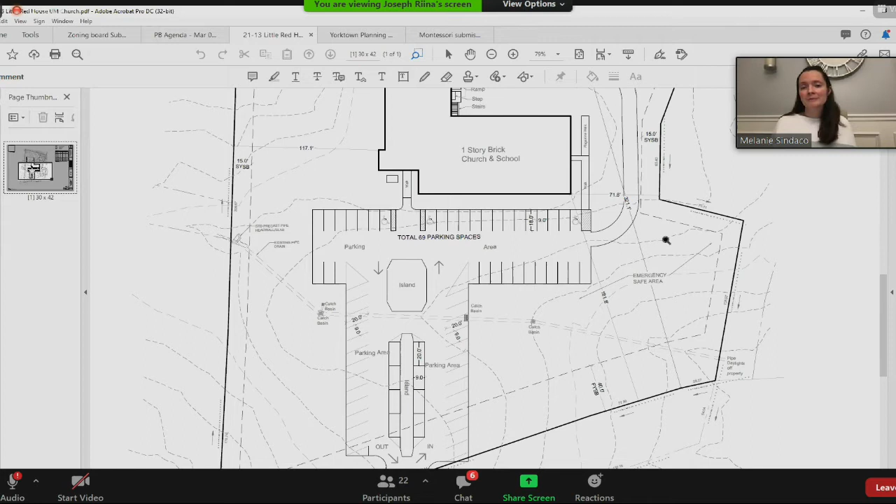Congratulations. Just in summary, you have a public assembly which is already there. You're not asking to expand the building at all. The use was already there. You're on a state road. You're going to be getting permits, I'm sure, from the building department. I know New York State governs the inside, the child care.

So on the planning end, outside of it already being used for this, John, what do you think our memo to the ZBA should be? What would we be concerned about?

Well, it's the difference in the number of kids that you'd be concerned about. I'm assuming this is a new application, not a renewal, so it's an addition. It's billed as a renewal, I believe. Yeah, but it seems like a new operator, not a Montessori school. Right, it's a different application, different applicant. The other special use permit hasn't expired yet, I think it expires in July.

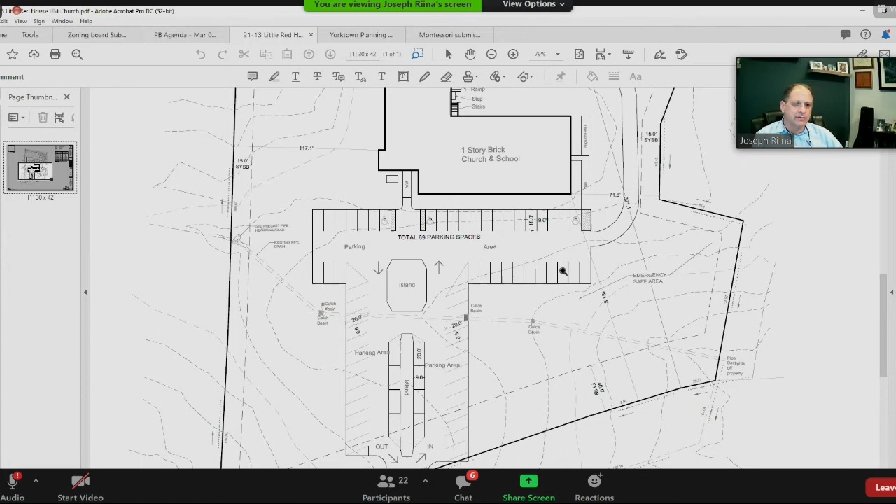I guess you could look at it either way. So you have an outdoor play area, right in the rear here, and you have 35 square feet per kid, right? Yes. And you have the proper number of toilets for the number of kids, which I calculated around four. Yes, we have enough. So given that it operated as such, and they have the proper square footage and so forth, I don't see anything largely deficient.

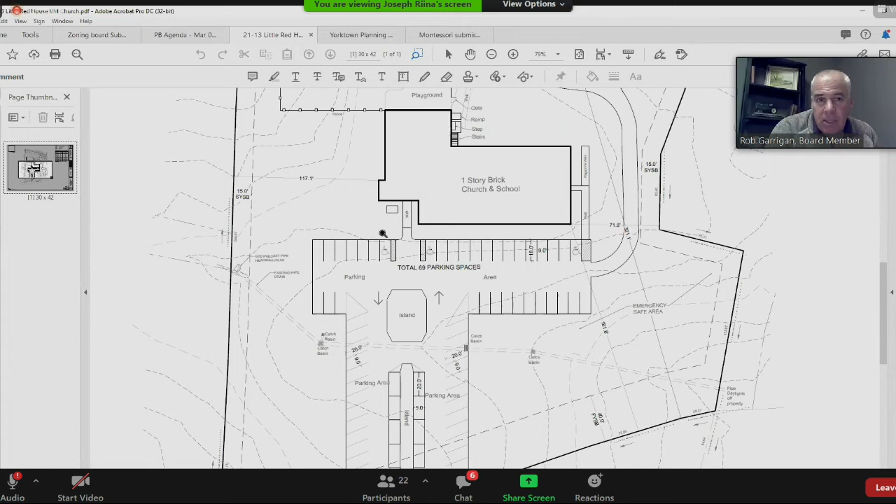Okay, any comments from the board? Just a quick question, John. Based on those criteria, is there a higher number that could be identified that all those things could support beyond what they're asking for right now? A higher number meaning more square footage? No, number of students. Well, it's 35 square feet per kid, so the more you go up, the more square footage you'd need. So what I'm getting at is, is this maxing that out? Is this the maximum number the space can support?

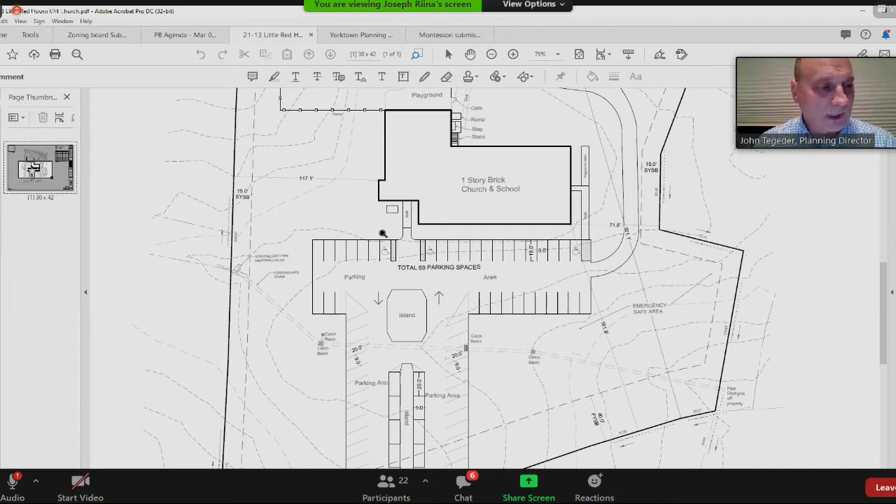No, the four classrooms they have are about 400 to 500 square feet more than needed for the number of kids, based on my quick calculation. It looks like there's one or two other classrooms not used right now, other spaces in the floor plan that aren't being used. So they could probably expand. This isn't maxed out, especially since it's a place of public assembly. Yeah, it's not maxed out, but the 35 is also a minimum, realize that as well.

Yeah, I'm comfortable with the number they're proposing now, and hopefully Melanie comes back next year to take the two other classroom spaces and expand the program. Thank you, I appreciate it. We don't want to max out every inch and fit everyone in, since 35 is the minimum, as John said. So we feel comfortable with this number for now. But if all goes well, fingers crossed, we're a small business, so right now this number feels doable for us.

Great, all right, so will we send a letter to the ZBA? It appears all the planning issues have been resolved. Yeah, I can send that, addressed to them.

I'm just thinking, by contrast to another daycare school program on the same road in a different location, this location is far superior, with a much greater line of sight and better ingress and egress, et cetera. And it's already in existence, so we're not expanding the building, we're not expanding the impervious surface. You could go on and on about the merits of this particular use in this location, in this building. So I think the letter we send, if the rest of the board agrees, would be a letter of support for the application.

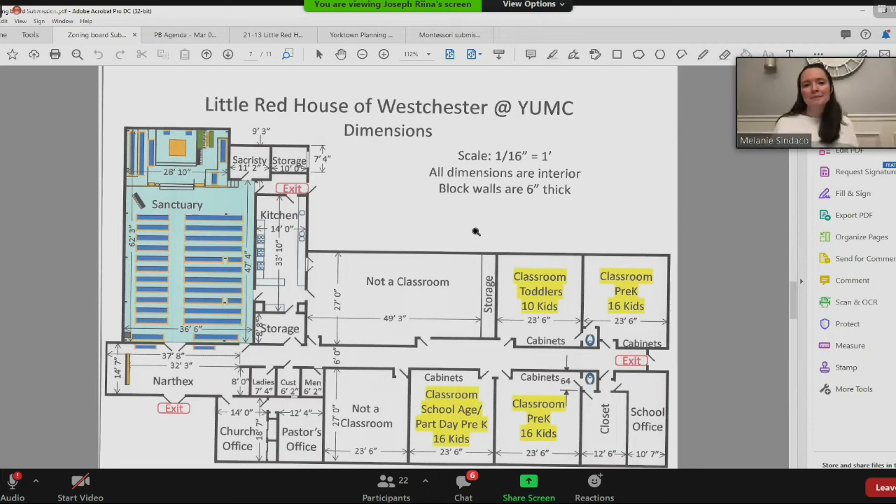Good, great, well good luck. Thank you, all the best. Good night. Bye, Joe. Good night, Joe. Bye, Melanie. All right, so we'll move on before Robin gets angry.

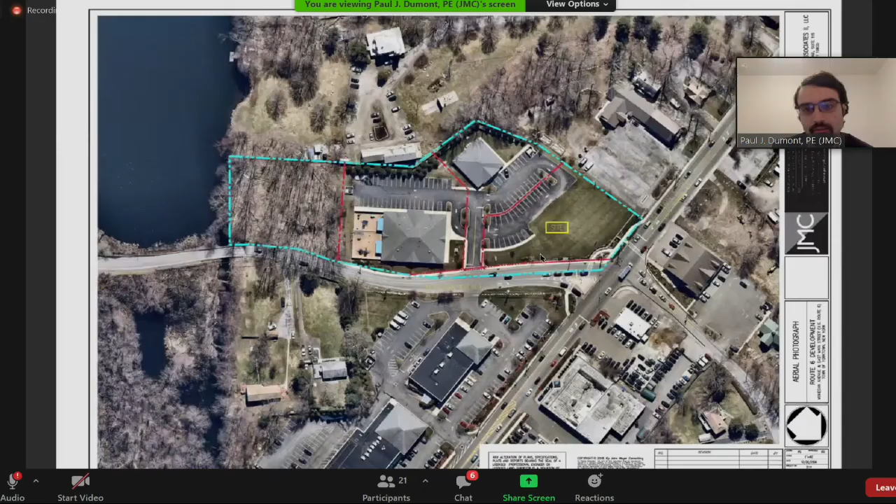For the record, Paul Dumont with JMC, here tonight on behalf of Keystone Mohegan Lake LLC. This is a continued discussion of the Taco Bell application that has been before you. Just to remind everybody, the site is located at the intersection of Route 6 and Mohegan Avenue in Mohegan Lake.

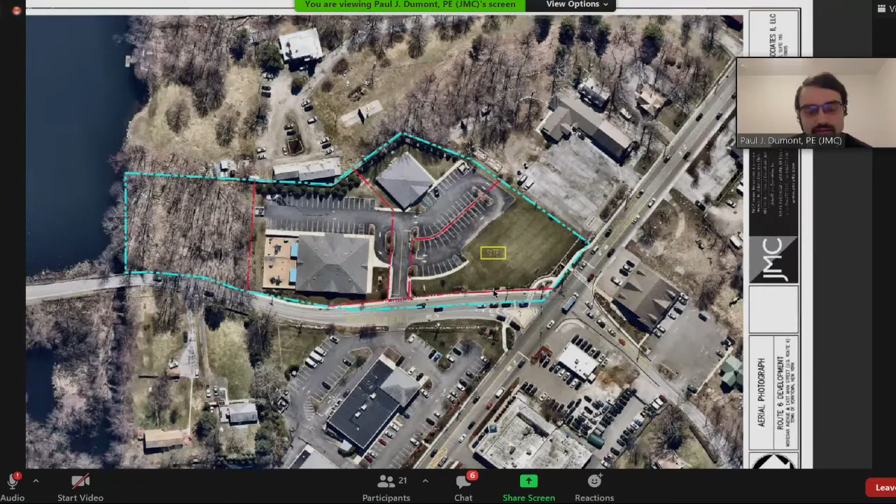At the last meeting, we had discussed the project's layout with your board, and we had also discussed a potential landscaping design in the front of the property, which could help establish a prominent corner on the site and help soften the views of the drive-through lane in the front of the property. So since we were last before you, we have prepared a landscaping design for those areas that we had discussed.

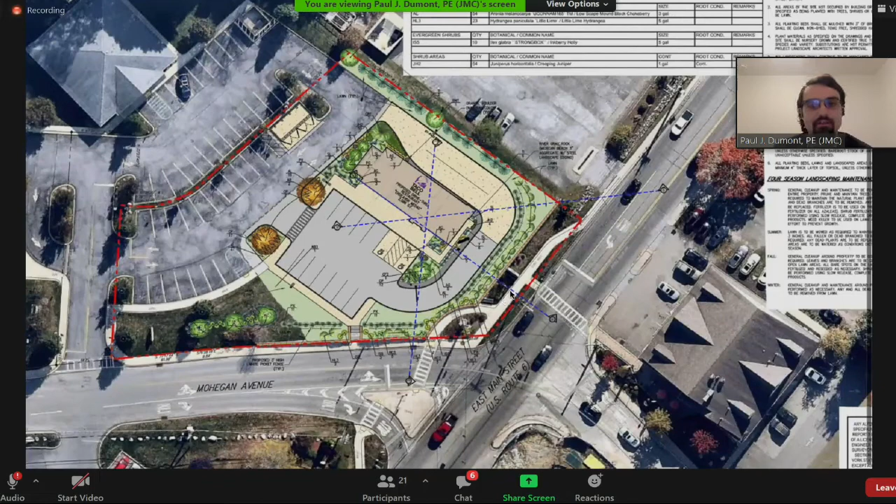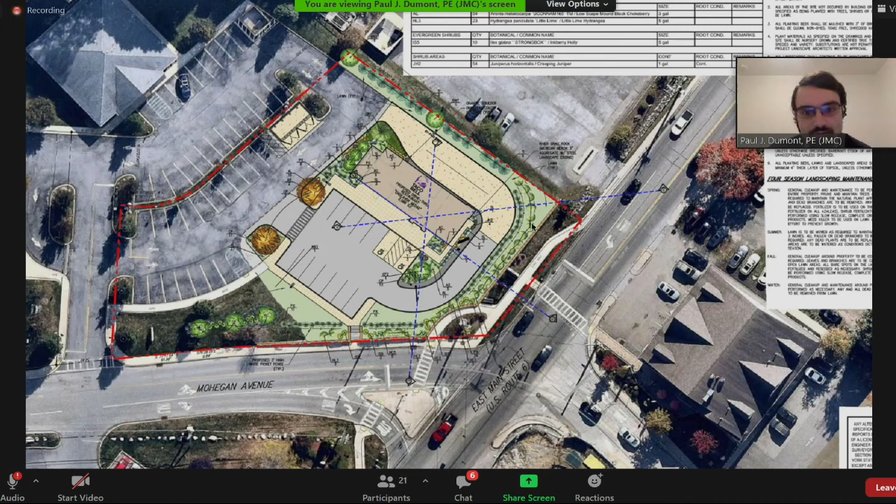What we're proposing is a combination of low-growing shrubs right behind the existing retaining wall that's there. We have some little lime hydrangeas, inkberry hollies, and some coral bells that we're proposing along the front line. We're further proposing a 3-foot high white picket fence right immediately behind the first layer of shrubs. And then we're proposing some fountain grasses behind the fence.

So all in all, what we're trying to achieve is a layered combination of the landscaping and the fencing, all low-growing items, which will help soften the view of the drive-through lane while still maintaining the building's visibility.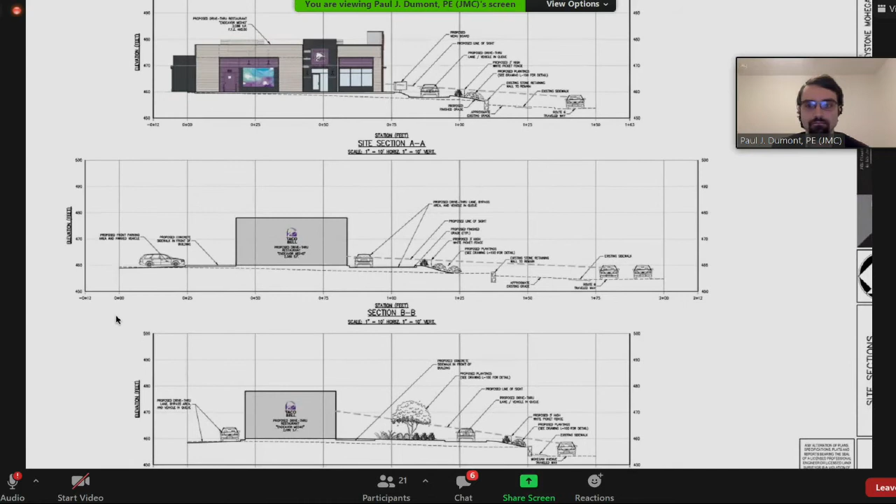What are you proposing in terms of the landscaping? So let's talk about the picket fence that you have, the 3-foot high white picket fence. Is there a detail on that? What's it look like? Yeah, so just give me 1 second, I could pull up another PDF.

Got it. And what's the landscaping that, if you go back to the sections, you're showing us some landscaping in both the front and behind it. The landscaping behind it, in other words, on the building side, seems as though that also breaks that sight line that you've drawn there. So are we assuming that the landscaping behind the fence is also as important to achieve the screening / buffering that you're proposing?

Yeah, I mean, the species behind the fence, right adjacent to the drive-through lane, are the fountain grasses. So it was just an added layer that our landscape architect picked just to add, to break up the visual a little bit.

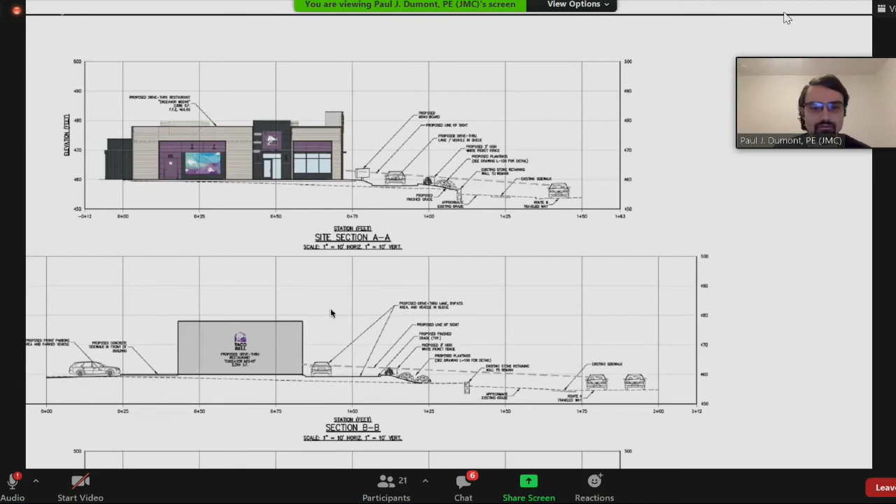Okay, so just to be clear, the board would like us to pursue the hedge alternative in place of the fencing and the shrubs, or a combination of both?

I mean, my opinion is I think you should do a combination. I think there needs to be some real thought put into how to make that work. And I know we talked about rotating the building back and forth, and it seems like this is the way you think it should be going.

But I got to tell you, when you drive the site, when you go out to the Popeyes, it's a big open area. This is a lot more intimate in the width of the roadways and the existing uses out there. I think it would be a good practice for each board member to go out and take a drive real quick. But that being said, I think I would bring the landscape architect to the next meeting.

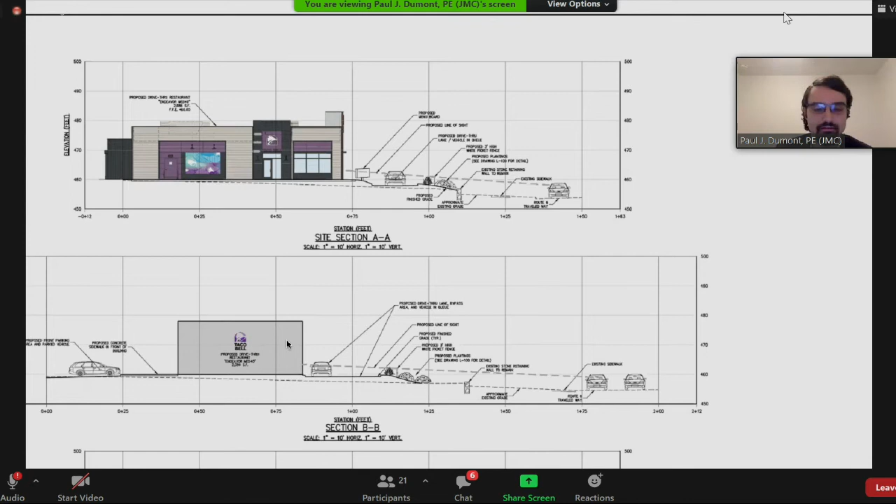How did you come up with the picket fence idea, Paul? We just thought it might be a nice element to add, to break up the areas of landscaping. It's a hard feature compared to the plant material, so it's a hard feature that'll aid in softening the drive-through lane, basically.

Yeah, I'm not sure. You have the stone wall there, you're going to have a low hedge. I think, frankly, a picket fence—this is just me speaking—is going to look out of place, frankly. It's more of a quaint residential type of fence. I think it's going to look out of place in this particular location.

Where we have right across the street the brand new Audi building that's kind of glitzy and glossy, attractive, and then you're going to have a brand new building with the Taco Bell restaurant. I'm trying to picture it in my mind. I just don't know if it's necessary. I'd be fine with just the stone wall and the hedge.

Yeah, I think I have to agree with you. I have to agree with you. That picket fence just doesn't look right. Yeah, I think you hit on it.

My suggestion was going to be to make sure you discuss with your architect using the picket fence along with the architecture of the building, whether or not that fits together, and even the color too. So I think you're hitting on the emotional response with the visual response that I had as well.

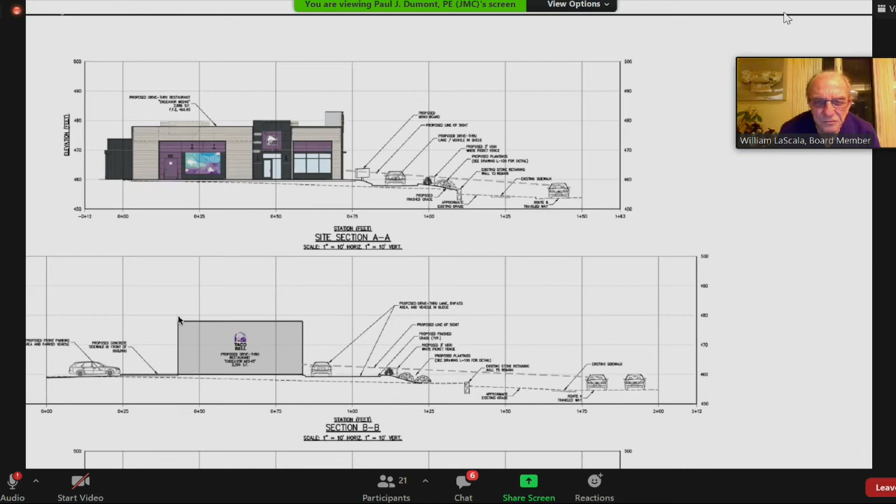That's why I think it's important for the landscape architect to be here, because that's what they do. If you just had shrubs along there, or some kind of greenery all year round, it would just be nice and soft. A picket fence is just too hard.

Yeah, boxwood hedge or something. I don't know how hardy they are once you're plowing and salting, or if they're going to suffer browning or whatever. But I'm sure the landscape architect, and possibly even yourself, Paul, would have a better idea than I would.

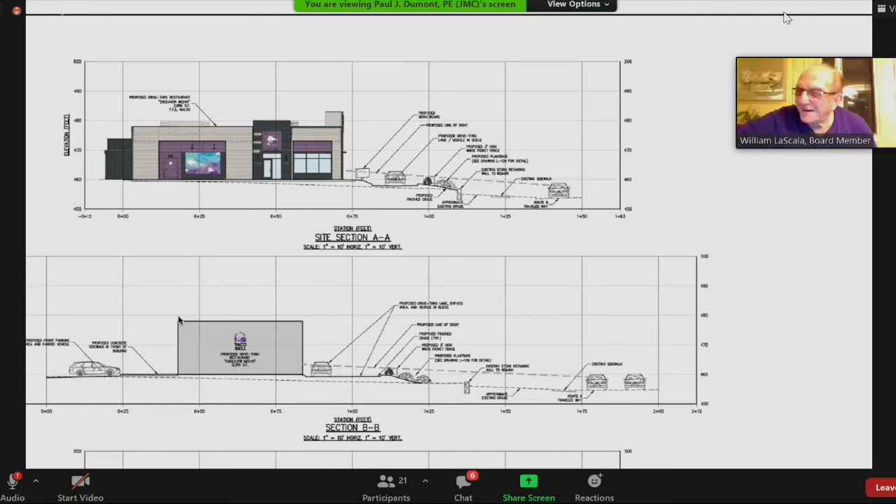But that type of thing, I think, would be visually sufficient to break up and obscure the view of most of the car. If I go there with the Suburban, maybe you see a little more than if I go with my wife's sedan. But you're up above the road, you're going to be somewhat obscured anyway.

But I'm glad you get to see the building beyond it with the signage. I'll get over to the site this week and take the Suburban when you go, Joe. Because this isn't going to be a push the snow site, this is going to be a remove the snow site. This is tight in there.

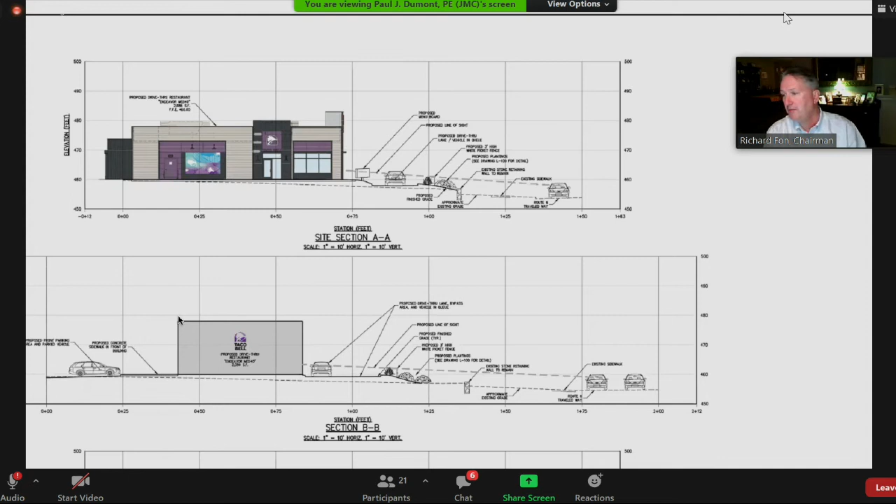Okay, number 13 is a large-scale solar power generation system at the Shrub Oak Plaza. This is a discussion of the special permit, located at 1426 East Main Street in Shrub Oak.

Hi, good evening everyone. I'll try to make this quick since it's getting late and you have more items after us. Thank you for having us again. Just to refresh everyone's memory, we're proposing a community solar project combining a rooftop and parking lot canopy project at the shopping plaza in Shrub Oak. Let me share my screen.

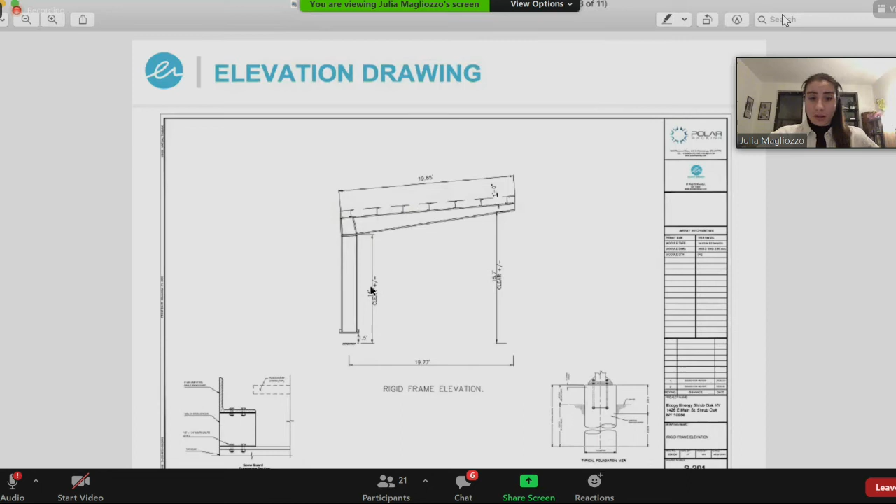This is the site plan, and here's an elevation of what those canopy structures will look like. If you pull in with a car, you'd pull in this way. On the shorter end, they're about 14 feet, and on the high end, about 16 feet off the ground.

We don't have a full landscaping plan at this point, but if the board would like to see one, we'd be happy to submit it. We do plan to include planting between the road and the canopy structures, though it will need to be limited in height to avoid shading. We're open to feedback and happy to discuss any preferences you might have.

We've also done a full tree inventory. There are 23 trees on site that will be impacted by this installation and will need to be removed. We'll consider these in our landscaping and mitigation plans if the board requests that, but we haven't contracted with a landscaper yet, so we don't have a full plan for that.

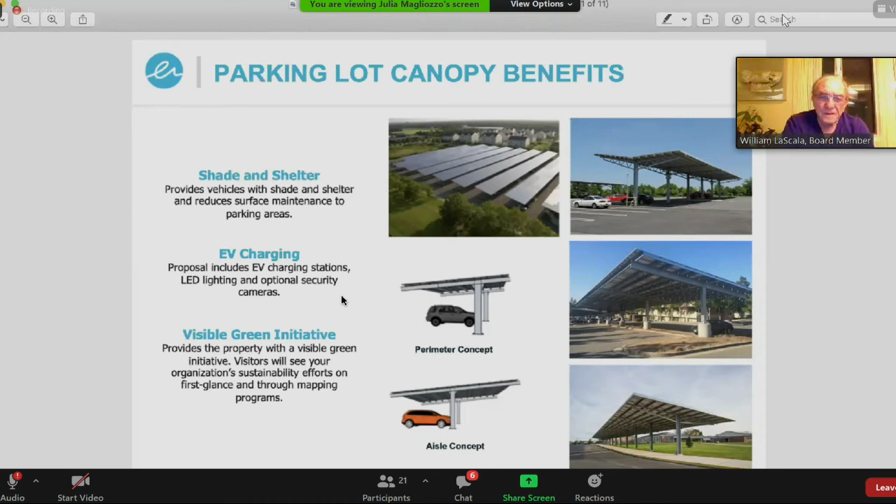Any comments from the board? You know, I don't want to be cynical. We're talking about Taco Bell and worrying about parking, visual pollution. This is absolutely, to me, visual pollution. I can't see how this could be in that area. I just don't see it. It really does fly in the opposite direction of what the area is.

And when you talk about blocking the JV Bagels place, the canopy is one thing, but if the owner was concerned about the canopy, these trees, which are beautiful, are now going to block most of the shopping center.

The architecture of the area, this industrial commercial use or look, is very different than I think part of this area was deemed to be almost a historical district at one point. I think the town was looking to put that in place. So, yeah, I agree with Bill. It's very different than what I think the intent of the area was meant to be.

Well, I would like to thank you, Julia, for the elevations and what you prepared for us. This does give us certainly a much better presentation than what was initially brought in. I cannot say I disagree with the other board members in terms of this particular location.

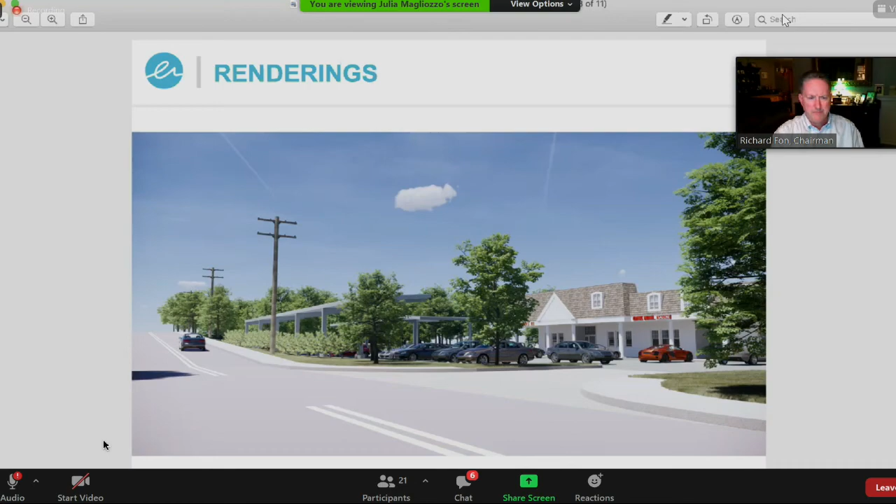If I may ask the board members, because we are proposing a few canopy structures here, is the primary objection this longer canopy that is on that main thoroughfare? For example, these in the back—are these more acceptable to you, or are these also too close to a roadway?

Well, the one in the front jumps out at me. The ones in the back don't really bother me as much, but I don't know what's going to go on back there in the future.

We are, just so you're aware, the town board is considering hamlet overlays for the 5 different hamlet areas in the town, and Shrub Oak is probably coming up next. I would imagine Shrub Oak and Mohegan Lake will be the next 2 overlay zones that are outlined, and it may well include the road in the back in terms of development of somewhat of a village concept overlay, perhaps. So even though at the present time, I think the 3 in the back wouldn't really bother me, if they were installed, putting them in the context of what might come into the town in the next several months, we may have the same kind of feeling.

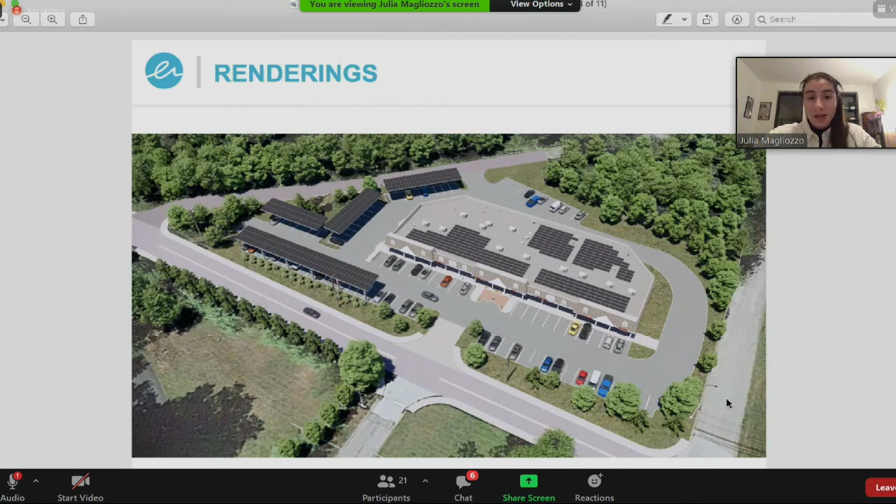Understood. We of course want this project to move forward, as does the property owner. As a developer we're constantly working towards these renewable energy goals, and in our mindset, it's if not here, then where, right? We need to be doing these types of solar projects wherever possible. From our perspective, this is a great site because it provides an amenity to people going to the shopping center, by providing covered parking and adding EV chargers to the site. So we do see a lot of benefits, but I recognize the concerns about the visuals. If we can rearrange this in a way the board would find more acceptable, I'm happy to consider that with our engineers and the property owner and bring it back. We don't want to just scrap the canopies completely. I would like to find an arrangement we can all agree with.

It looks like you've got potential to do that, so let's see what you can come up with. And in the area, if you look at Google Earth, there are seas of asphalt out there. You've got the church across the street, right next door. Seton, Acme, you've got the Lakeland School District. There are areas set back that are not so on top of that corridor, and I'm sure you've driven it. As you pull off and drive through, this is kind of a cut through for Route 6, but it's very different than what's out there now.

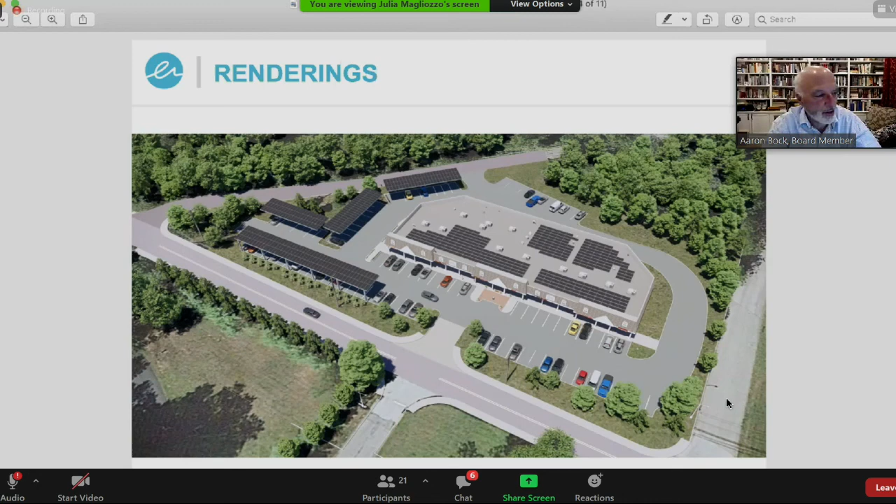You've got this whole triangle, you're only showing a piece of your property here. According to the survey, the road on the right and the new road on top meet at a point, right back here. You've got some room to take that whole front array and put it in the back, hide it, take it right off the street. You're gonna have to take down some trees, though.

I do know the one thing that will possibly hamper that back there is wetlands. There is a stream that goes through there, the back is all wet. I remember this site when it was first developed, but I think they're further away from that at this point. It's crept.

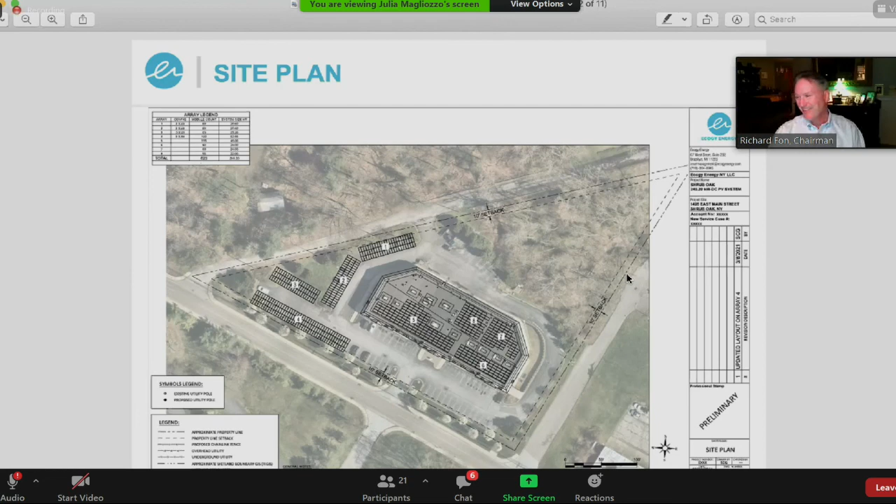Okay, next we have a town board referral. This is for the Granite Knoll Sports Complex, location on Stony Street. Oh, Robin added a few more items.

I think this is actually for the parkland alienation they have to do, not really for the project itself, which I believe you'll be getting at some point. I don't have any issues with this. No, this is the perfect place for it. But this is a procedure, right Ed? That you guys have to go to the state.

For the above canopies, it's really not a problem per se because there's no parkland other than the posts being alienated, and they're looking to change those laws anyway to allow this. But in the meantime, before we tick the clock out because they're eager to run, we'll start moving it just in case there are distractions in New York State government that prevent the laws from being changed. I think this is a great location.